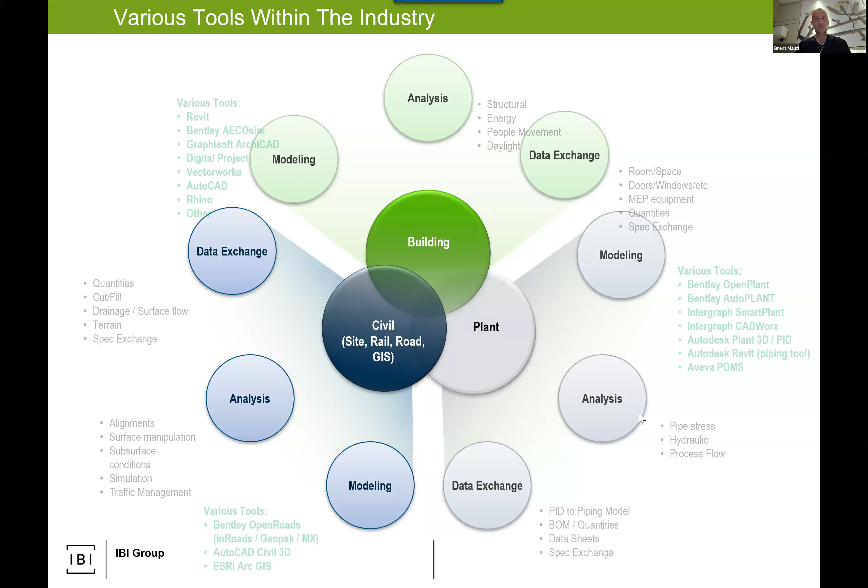When I talk BIM authorship, and I jumped through this slide the first day, the reason I define them this way is two main reasons. Number one, all of the vendors define it this way. If you go to a vendor, they'll usually tell you, we've got tools for vertical buildings, tools for linear infrastructure, tools for heavy industrial, plant, process, manufacturing. The other reason is you've got data standards that ensure interoperability to some extent across those tools. So think Revit, ArchiCAD, Vectorworks, etc. I don't have Allplan, which is in the same vendor, and I don't have BricsCAD, so my trusty bullet called Other covers me.

The IFC ISO standard, 16739, whatever it is, ensures common data taxonomy across building applications. What that means: door is door, wall is wall, slab is slab, roof is roof. Simple, right? If Revit does something phenomenally complex, the IFC standard will say, looks good, don't know what you mean. So you have a wall with weird parameters that aren't part of the standard. We'll grab wall, material, fire rating, plus length, width, height, area, volume, all fundamental things, and give it to ArchiCAD, Vectorworks, whatever, and those fundamental data taxonomy components will cross over.

Let me just see. I'll talk about plants in just a moment. So give me a second there.

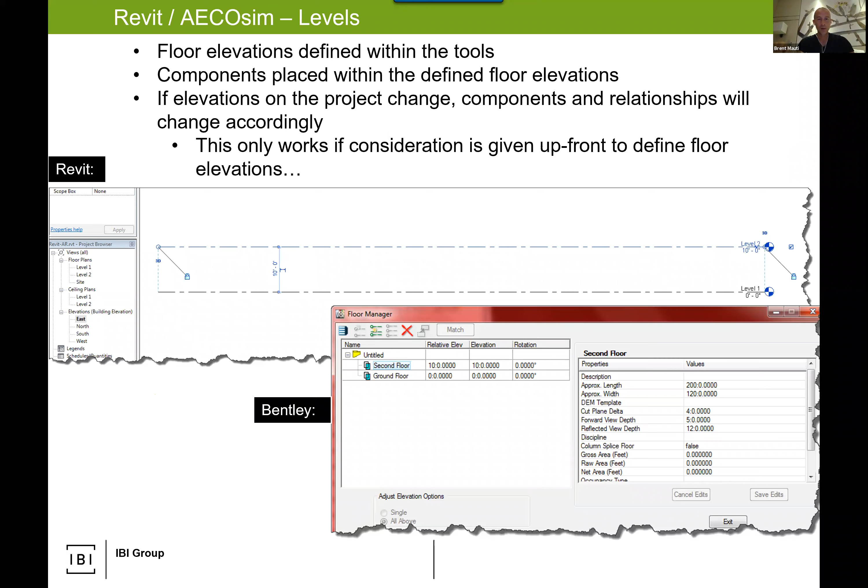These are ISO standard IFC components. When this goes to IFC, a level is a level. Your floor levels, walls—the complexity of walls is what do you want the makeup to be, but walls are walls. And you can't be unintelligent. You just have to place walls. You have your generic walls, you have sandwich walls.

They are the same. In Revit, I'll make a family. In Bentley, I make what they call a parametric cell. Guess what? It's a family. That's all it is.

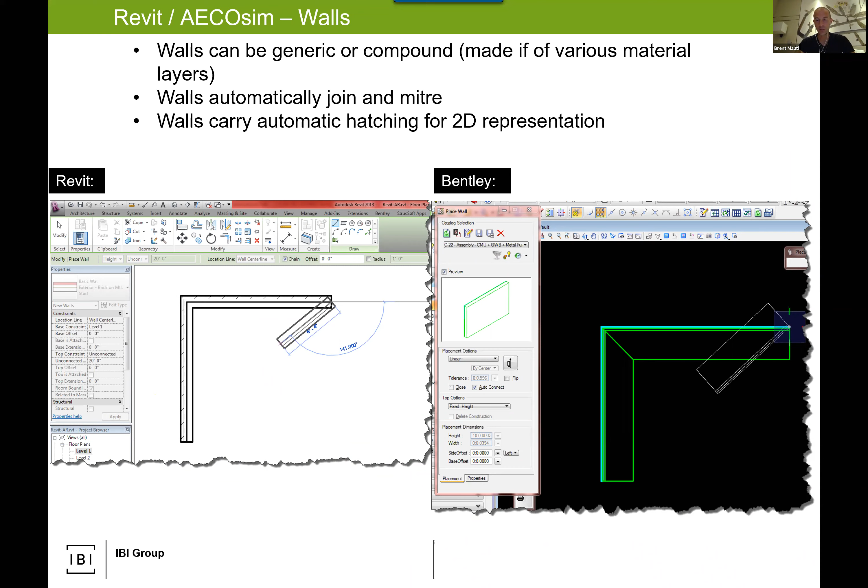Floors—you get the point here, what I'm trying to do? Same concept. I always say if I had nothing to do someday, I would want to make this box in every application. IBI should one day do it in Vectorworks, and I should do it in Allplan, because it'll be exactly the same. Floors flood between walls by points.

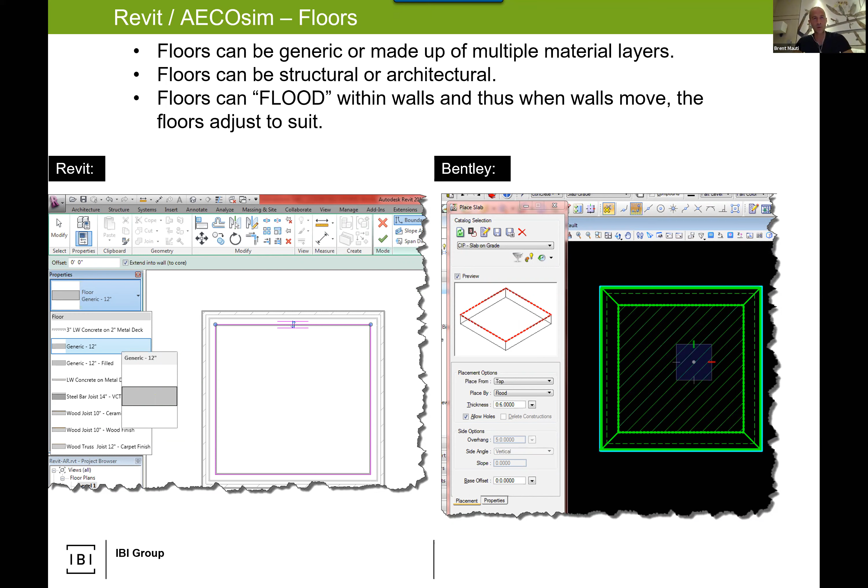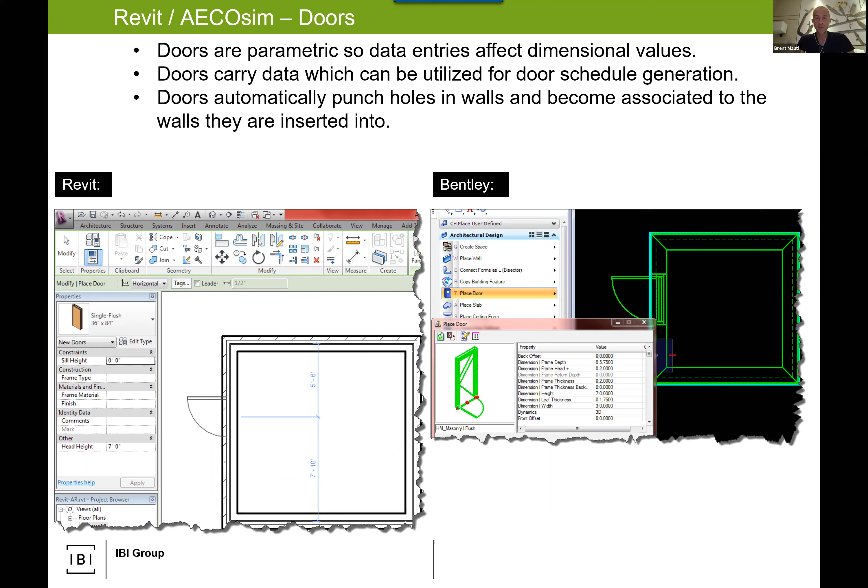Doors—every architect has to deal with doors. Well, they're all based on a library. Same with windows. When you place these, there are geometric constraints.

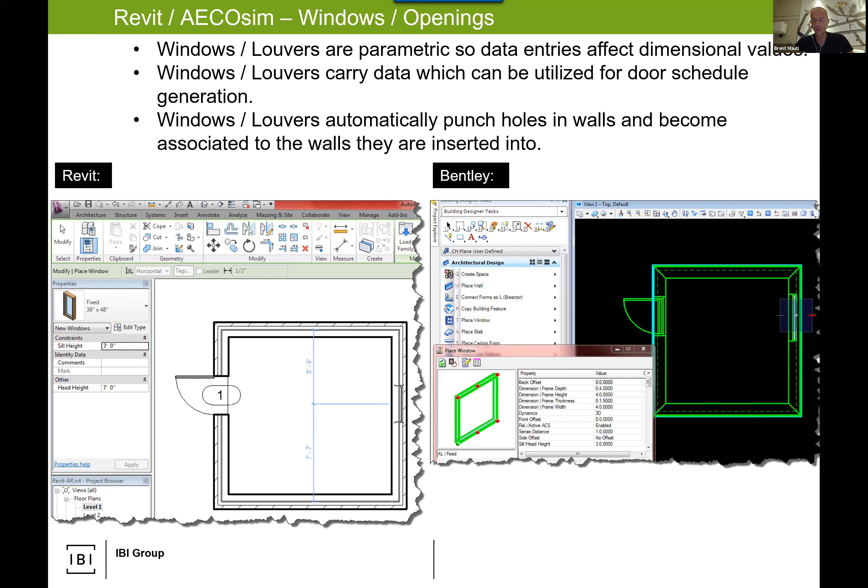On the instance of the door, I'll have all of the other parameters. Here's the geometry parameters in the instance. Here in Bentley, here's the geometry. If I scrolled that down, it would be all my parameters—hardware, fire rating, etc. It's all there. Specialty components like curtain walls, same thing.

And the trick, the real challenge—it's just like the dimension line. How do I make this in Bentley if I only know how to make a family in Revit? And I'll tell you, probably very easily. It's intriguing because Bentley has what they call the parametric builder.

In Revit, you open up an RFA or build a component and save it as a family. But they're the same. Once I'm in there manipulating it, it's unbelievable how common they are because they have to be—it's a curtain wall, and it's ISO standard.

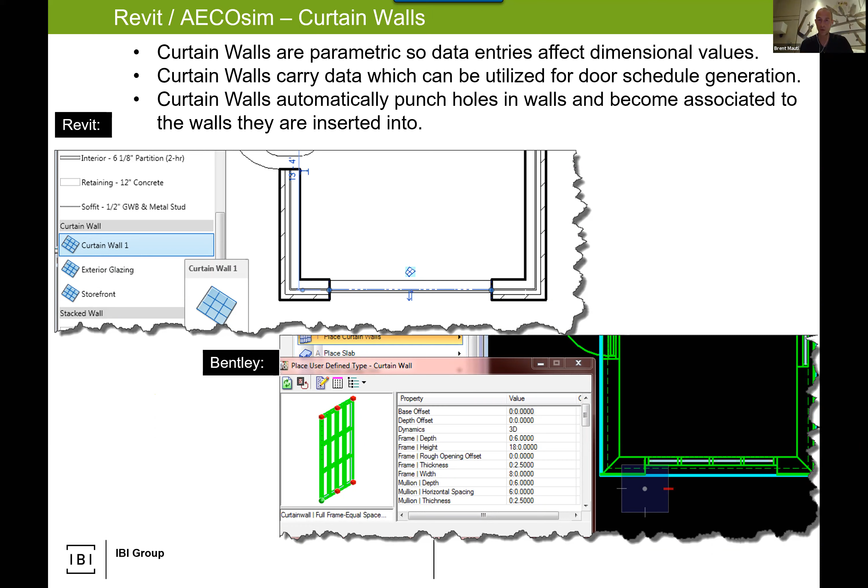Place a roof, same thing—slopes, all architecturally driven. Or is it a gable roof, a gambrel roof, a hip roof? None of that changes. Stairs are fun.

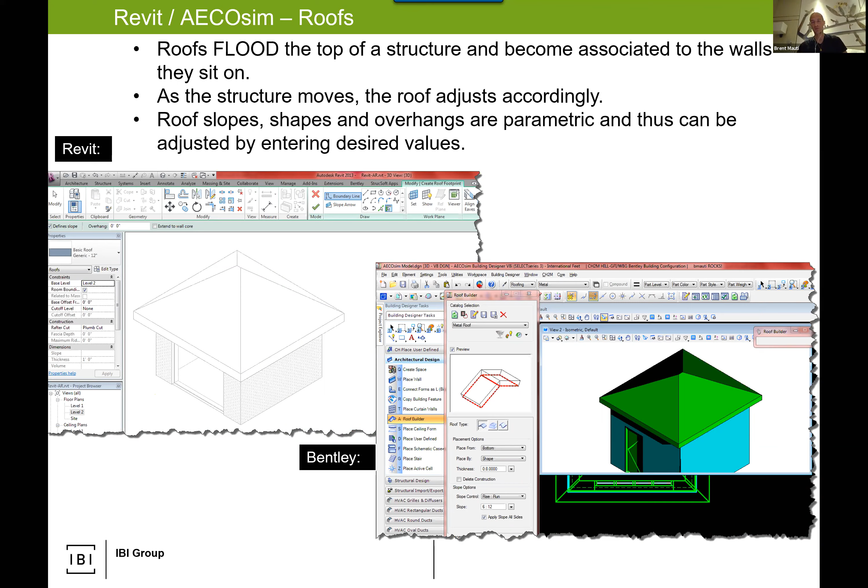And again, why this is so important is because we want to analyze our models at some point. So if we're able to analyze our stairs, then we're able to clearly analyze path to exit. So if I want to do a code analysis, I need to know my stair width, my rise, and my tread. All of that's geometric metadata sitting right here.

I would never draw lines and extrude it, like in the days of 3D modeling 20 years ago. Never. I need data, and the tools are so profusely intelligent that the data is always there for me.

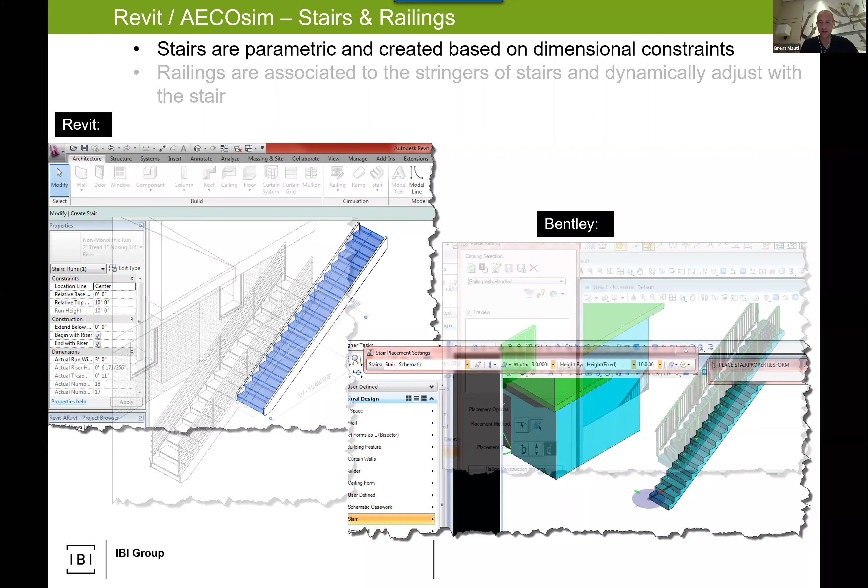Handrail, same thing—creating handrail, you can get as inventive as you want, but handrail is handrail. From a code perspective, from a design perspective, I want the aesthetic, but I want to be able to check: is my handrail this high? If it's not, bad. If it is, good. Simple. There's no subjective thinking—it just has to be what it has to be.

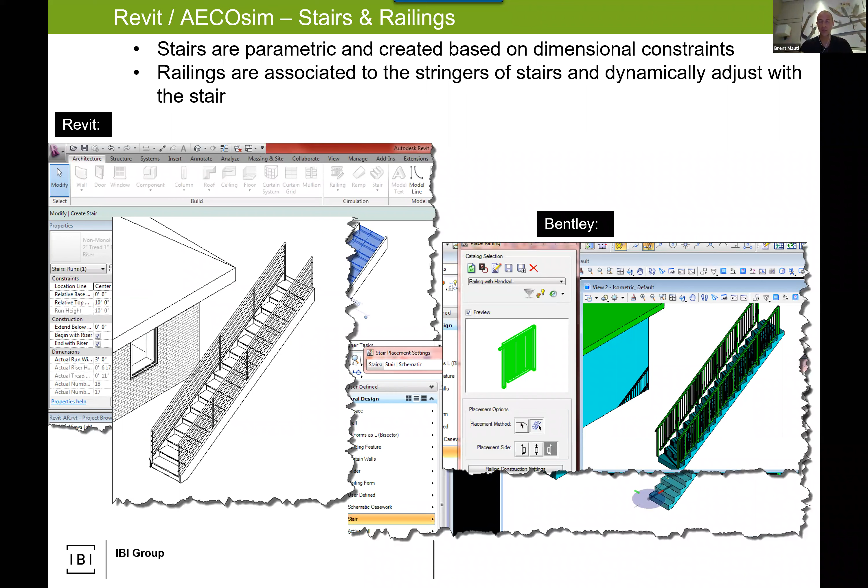And all that stuff gets built into these tools. Create drawings, visualize them however you want. So on the left, I show the traditional look that Revit does out of the box—looks like my pencil, yay for pencils. On the right, Bentley uses what it calls symbology, so I say I want it to be this color, and then it prints by color, and I could make it look like the Revit view if I wanted to. I can also force tags to show up.

Oh my God, brain fart.

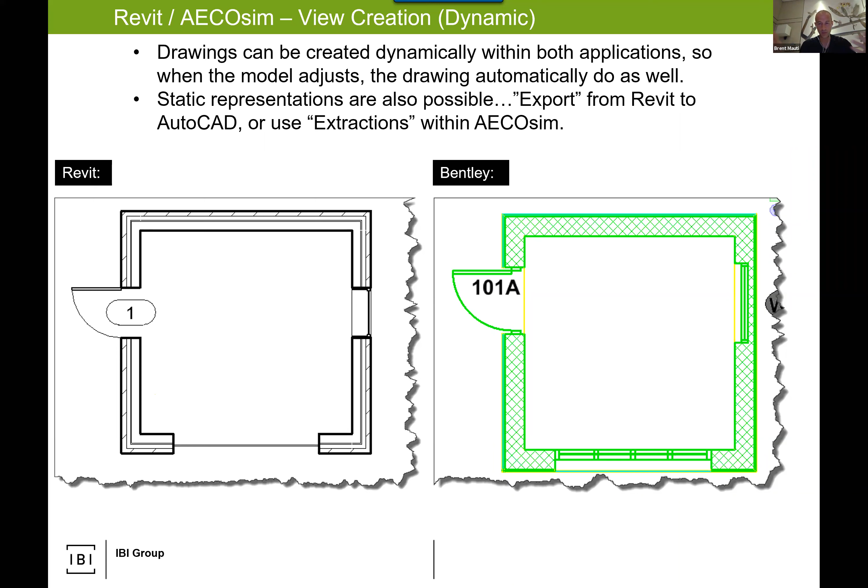Parameter values, parameters, tags in Bentley, parameters in Revit. You can use whatever symbol to make it show, but the data is all there, exactly the same. And you guys in your Revit course, this is what you're doing.

Structural - there's a backbone library. I think in two weeks I'll show a bit of what that data is. All of this is to support structural analysis. When I place these columns, all the data I enter is vehemently important. I described this once - this is a column.

I'm not going to place this column and then rotate it 90 degrees and say, yay, now I have a beam. No, you've just destroyed any hope of structural analysis. And I've seen people do that. Why is the building falling? I don't know, it looks fine in the model, but not in the analysis. It's because of simple things like that.

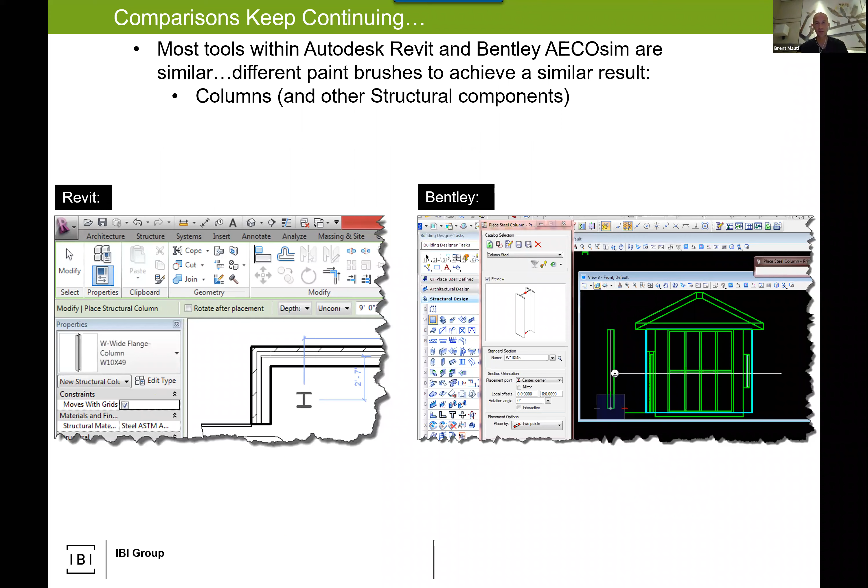Ductwork - it's all based on ducting standards, and some of them are based on how we actually spool ducts. So what are the sizes, what increments am I going to make a width? Here you see it's 18 inches wide, 12 inches deep. Am I going to make something 12.1 and 18.6653? I'd be crazy if I did that.

So what these tools do is actually prevent that - they have a bit of forced selection, which is what the plant tools do profusely on the plant side. But we want to control this a bit.

Same with cable trays - they're very specific because they have huge turning radiuses that have to be accounted for. Both Revit and Bentley have pretty good electrical tools built in to accommodate this. When you get to analysis, the question becomes: how many wires fit in my cable tray? Do I need two cable trays to fit more wires? How much current is flowing through my wires? What's my draw at the electrical feed? What's the current and voltage at all the distribution points?

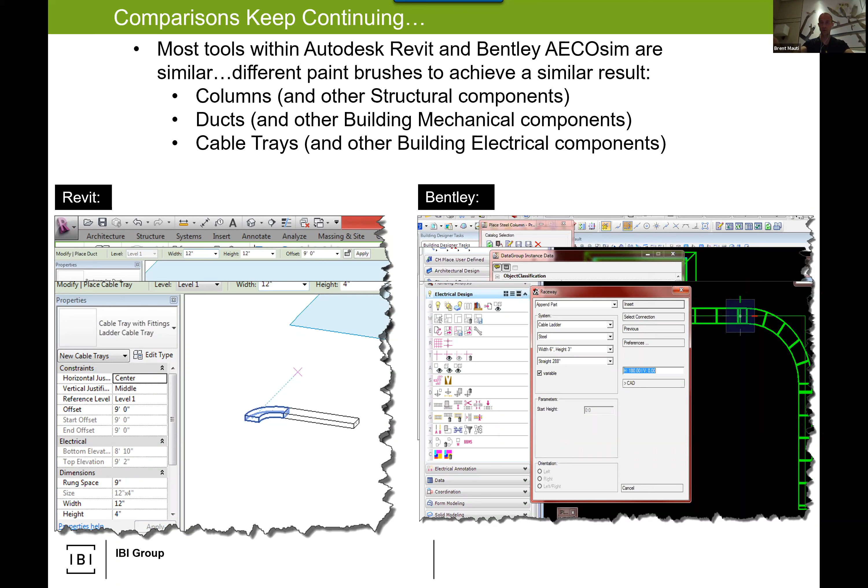Same with airflow - I skipped that here. When this is all right, what's my air pressure here? Once I turn the corner, what's my air pressure there? These are your 90-degree square ducts - what if I turn them into 90-degree elbows? How does that better my flow? Because I don't have the hard stop as I do here.

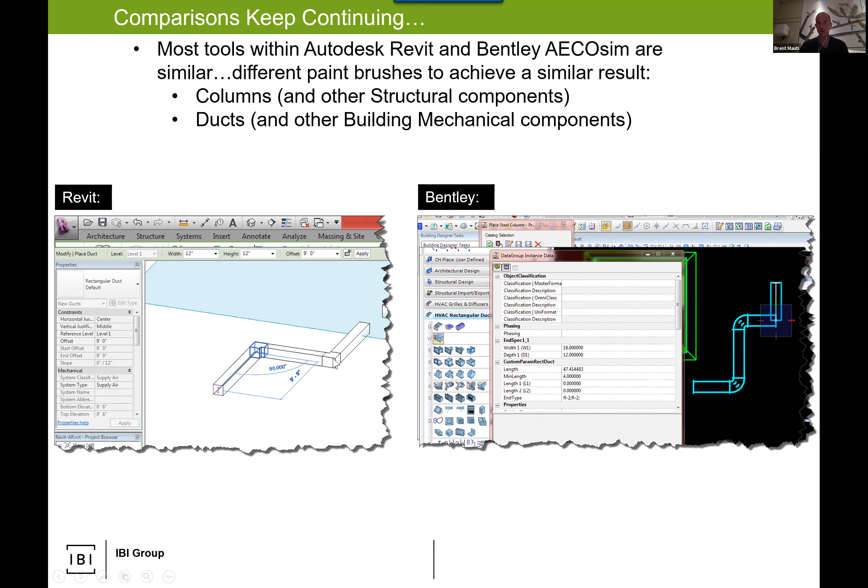The other thing Bentley's done - as I said, Autodesk is notorious for buying a bunch of stuff and having these buckets: Autodesk, AutoCAD, Revit, Navisworks, Inventor, and others, and that's it. Then we complain as users - oh my God, I need to use Inventor to make a component, how do I get it into a Revit family? Autodesk says okay, we'll try to get a way to get from Inventor into Revit, and now we can.

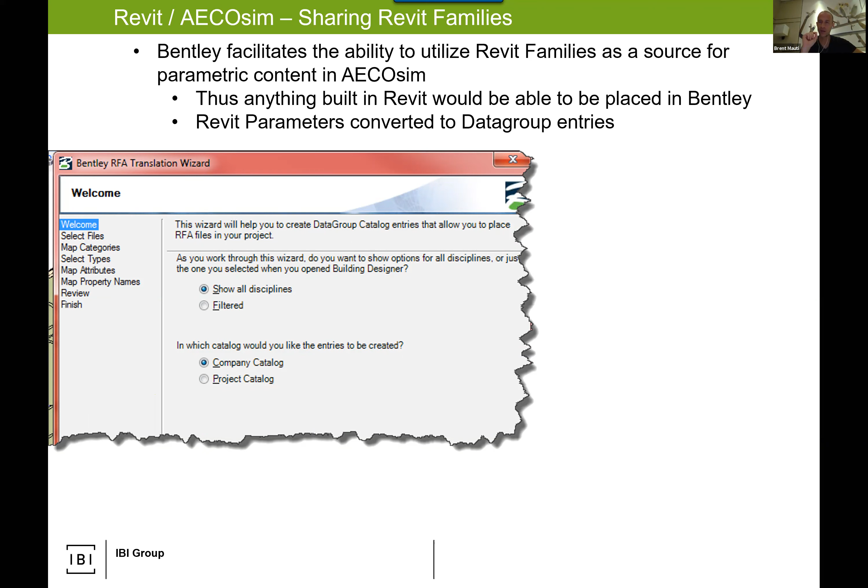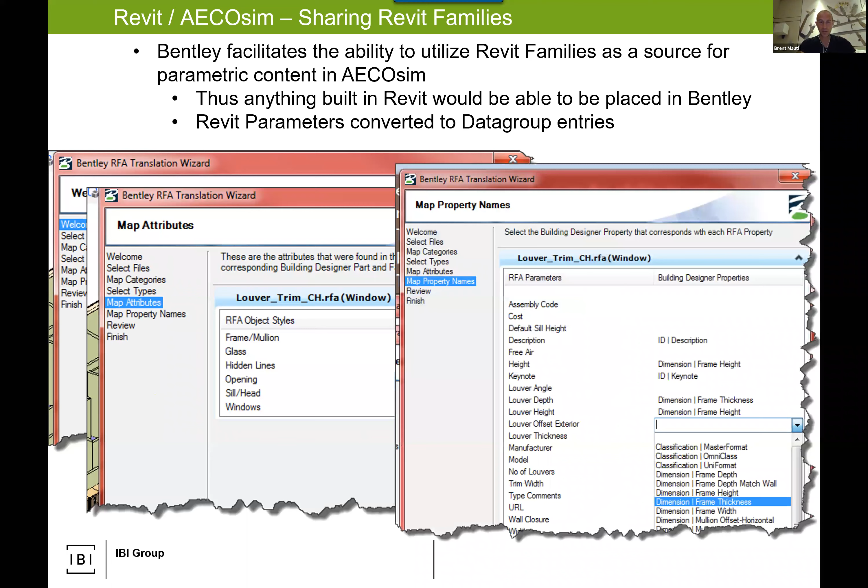Bentley, this is from five years ago, said you know what, there's a whole host of really awesome Revit files out there, Revit families. Let's build an importer that can bring an RFA into Bentley and map the parameters to Bentley data. A wonderful thing - anytime we have a Bentley project at IBI, there's none of this 'oh my God, we're going to waste so much time remaking all our content.' No, we're just going to drop our content in. Very powerful - this is what Bentley calls its RFA translation or RFA interpreter.

This helps them, because they have a good foothold on the civil side, convince their civil-based clients - transit clients - you can ask for the building to be in Bentley's OpenBuildings, and don't worry, your consultants won't revolt because all their content can be brought in. The consultants will still complain if they're Revit users, but they can't say we lose all our content.

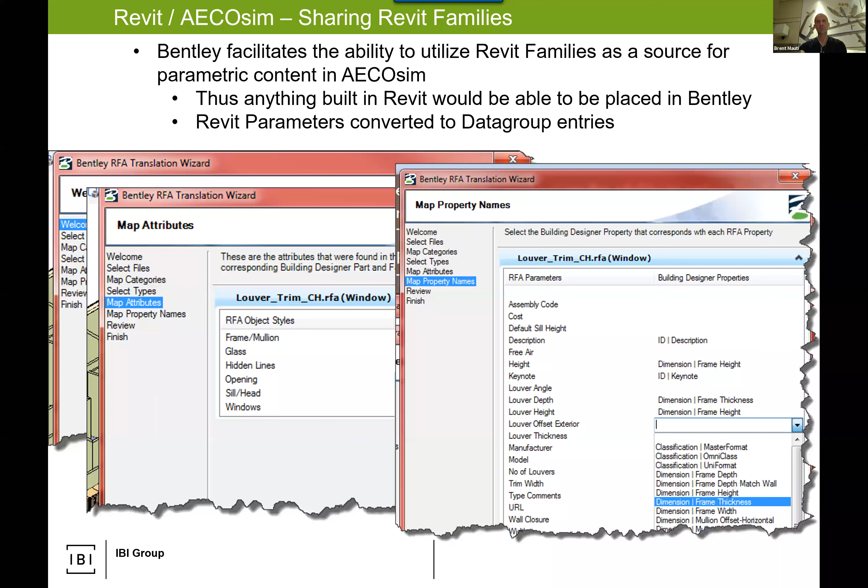Just a brief one here - because the data is interoperable based on the IFC standard, the ISO standard, this was a research project I did with the University of Toronto. Again, this is now 2013. We said let's make a tool to pass data to and from Revit and Bentley.

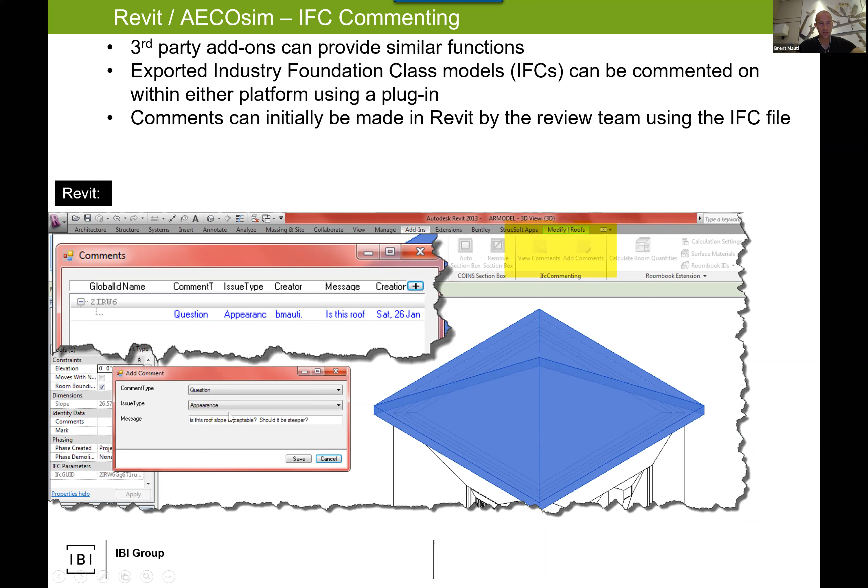So we built this little IFC commenting tool - it was a little add-on. We said we just want to start to add dialogue to components. So this is added to a Revit roof - is this a question about the roof? Somebody then takes that file and brings it into Bentley.

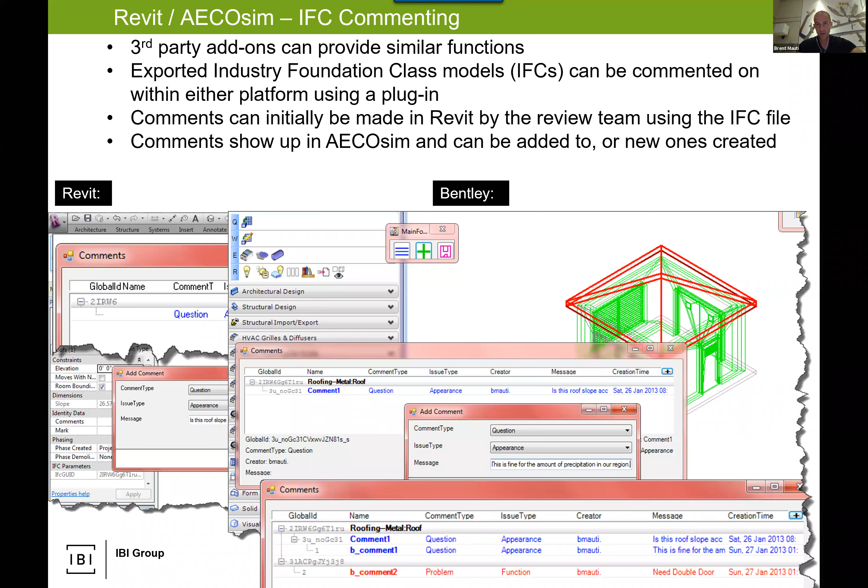Okay, so this is a Revit model that goes out to IFC. The IFC comes into Bentley, and I can add a comment to the response to the comment. Then we have a general dialogue that goes back and forth between Revit and Bentley. In Revit, I can bring those comments back in.

Now, it was a prototype, it was an idea. And the reason we saw value to this, and why I would show this to you, is this is the power - this isn't commercial or anything, but this is the power of traversing information to and from applications. The critical thing though is understanding what can traverse. Using IFC as the lowest common denominator allows it to happen.

Now, you'll go in the industry, you'll hear IFC sucks. You say, well, why? And it's always down to this: I tried to bring an IFC model from Bentley into Revit and then model in Revit, and I couldn't do it because you name it, or vice versa. And I say, well, obviously, IFC was never really meant to say, let me go from Revit, stop authoring, go to Vectorworks, and continue.

It's allowing us to traverse the lowest common denominator. So if I was in Vectorworks and you were in Revit, I would say, I need your model, what you're authoring, as a backdrop for my work. So let's say you're doing architectural and structural, and I'm just doing building mechanical. I want to run my ducts in and around the walls, the ceiling, the columns, etc.

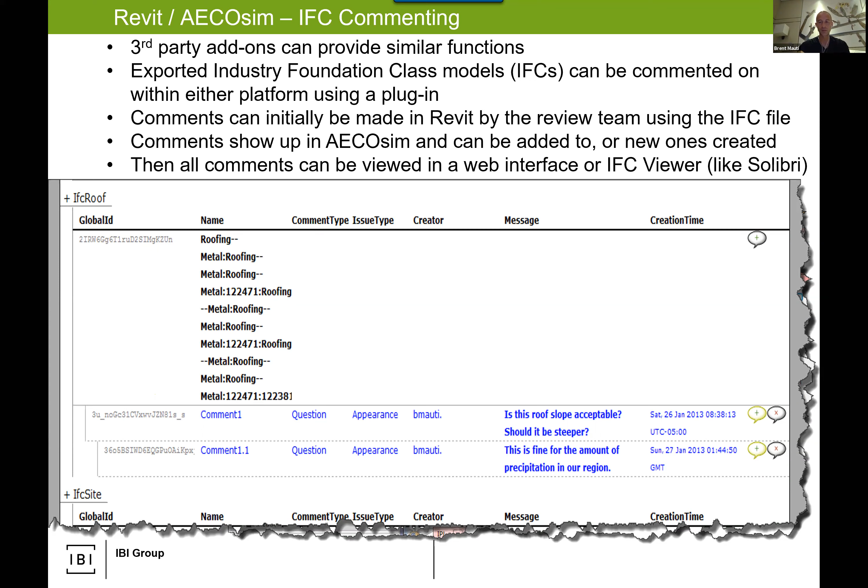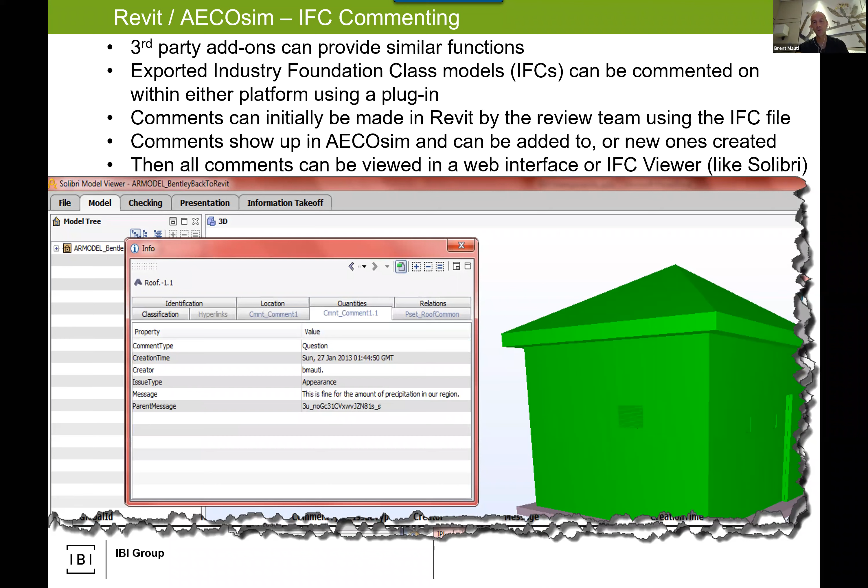And then here, just showing in Solibri all of the data - the comments were recognized because it was standard IFC taxonomy. So conceptually, you grab data and you do more with it. So that's the building world, and I highlight Revit - it's the most prevalent, it's what IBI uses, but as I said, we use others as well.

Civil BIM authoring tools, okay? When I say it this way, sometimes I get the dirty looks, like BIM is for buildings. BIM has building authoring tools. BIM has civil authoring tools. And I press this - civil being not structural, not building structural, okay?

Structural design is governed by the IFC standard, which is why it's placed inside buildings. This concept of civil structures, it's just - I want to say semantics - that we have to just overcome, especially in the industry where a civil engineer does building structures. It's just, we have to just understand the differences. So civil tools, talked a bit about this already.

Couple things that I want to stress on here. So if I ask a question - which civil BIM authoring tool sits on AutoCAD as its native - it's Civil 3D. Hence, it's called AutoCAD Civil 3D. People don't know that, and it's made by Autodesk. I've heard people bastardize that.

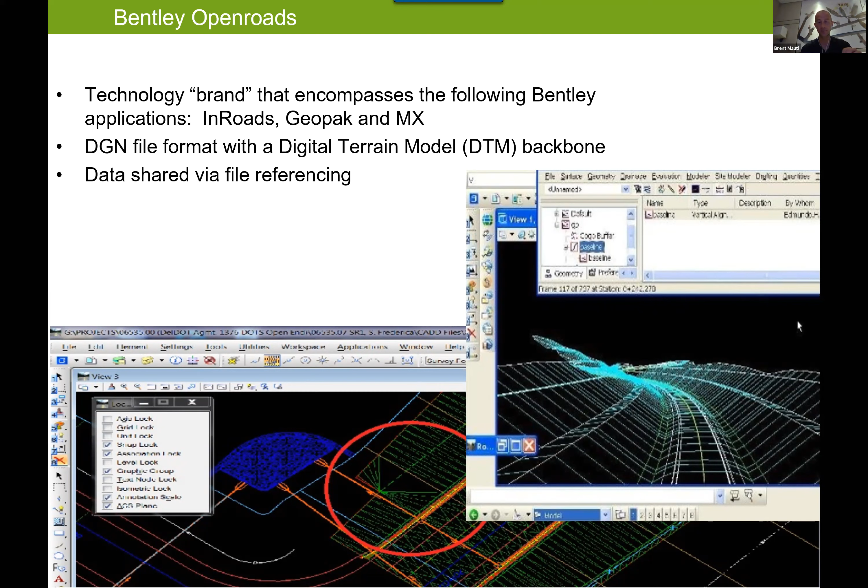Okay, so these are the tools. And I only show one, but it's InRoads, GEOPAK, MX, Open. It's all conceptually the same. Then there's this, my favorite. You install the site toolbar in Revit. And you have site tools. And now it gets a little more intelligent. You can import gbXML. You can import the XML of civil, LandXML, I think. You can bring things in. Awesome. But I describe this as the architect's site tools.

Civil engineers can't use this. There's no integration of civil data. There's no civil analytics. There's no civil anything. What this does is it allows me to connect or bring a Civil 3D model into Revit for me to use as a potential reference. And I think that's critical. So that goes back to that IFC concept. I'm not going to export Revit to IFC so you can model in Vectorworks. I'm not going to import Civil 3D into Revit so that the civil engineer can now come and do engineering in Revit, site analysis, cut fill analysis. They wouldn't do that.

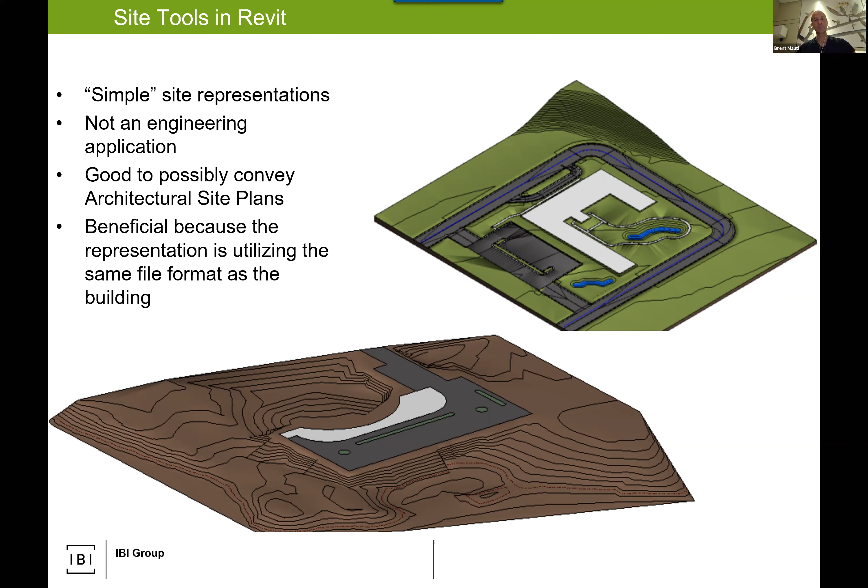Landscape. Landscape BIM is in the nether world of BIM, okay? There is no landscape BIM tool, and there's actually a really good document. It would take me too long to find it, so I won't try. It's a pink book published in the UK called, I think, just BIM for Landscape. And it just talks about the fact that there is no tool. So we're going to get situations like this. So we ask the question, we have landscape architecture. What do we want to do?

Revit is on there because oftentimes landscape is dealing with rectilinear portions of the site immediately outside the building. So imagine you have your building and then you have a landscape planter, maybe multiple levels on your building that are landscaped. Basically the underpinning of what you see is a Revit model. Then we use Revit.

The best example is hard urban landscape. You walk into any downtown area, you see all of these stepped landscapes. Well, they're all on top of parking garages or whatever. There are models, or there should be models, of all the stuff underneath. So if I have a Revit concrete slab, I just need to add the detail, add the layer of what the landscape will be. So we might add a landscape slab, a slab representing the layers of landscape, and then put in components.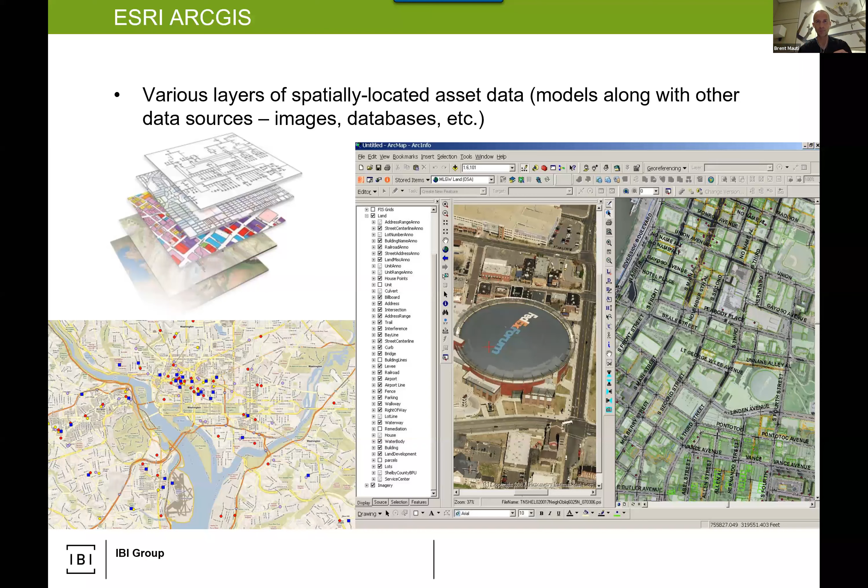So I always say, if we're working properly from macro to micro, you've got your city layer, your street layer, you get to your building, the building as a whole. Then you kick in your BIMs and you get into the inside of the building, right down to the components and asset management, macro to micro. So that's the civil world.

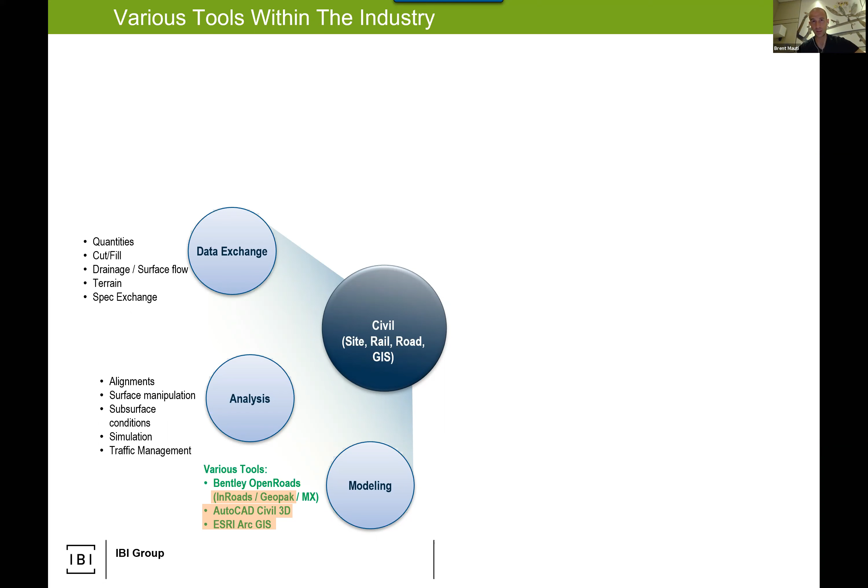In IBI Group, we actually use all of these. Again, my only experience with MX was back in my CH2M Hill days, only in Australia and Singapore. But we use these, which are all now branded through OpenRoads. So if you're doing civil-based work, civil engineering, linear infrastructure, you're going to come across them all. And if you're doing just building stuff, you'll see them both.

Well, what do you mean? You draw the center line of the pipe. Yeah, but I got to fill out all this stuff. Well, you should have been doing that to begin with. What are you modeling? What are you drawing? And then you get all these dumb conversations, right? The point is, like place wall in Revit. What wall are you placing? What door are you placing? Is it fire rated? Is it generic?

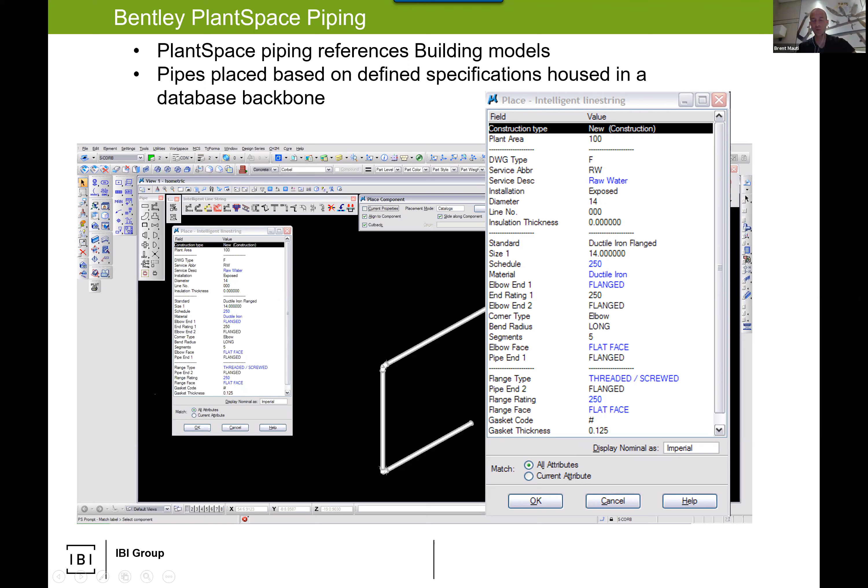Make a selection. Here, there's a little more selections, but they're all controlled. So notice the blue things, that's all I can pick. Everything else just happens. So when I pick raw water, it sets all these other things. Then I can pick a couple sizes, and away I go. This is what the database looks like. So this is a piping spec.

And as an architect, learning this was intriguing. But all it basically does is it says, for this service, so for atmospheric air, this is the pipe spec, C208, PVC, fiberglass reinforced plastic, FRP. So that's your pipe spec. That's your size. I can go 0.125 to 144. This must be imperial in inches. So I think that's 144 inches down to 0.125 inch.

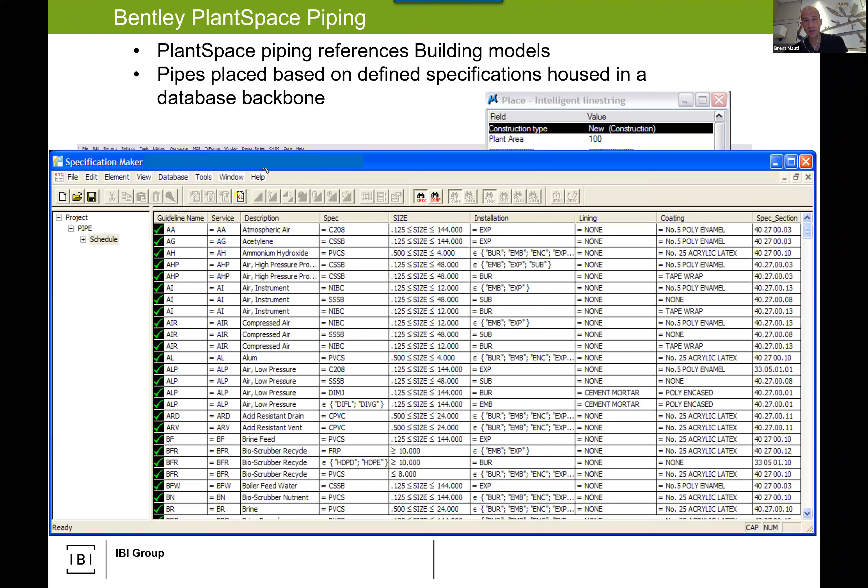Exposed installation, no lining, and that's its coating. And that's its spec. I'm going to talk about linking to specs later. Very critical. Once this data is set, I model. And it's that easy. So that was Bentley's PlantSpace. Bentley AutoPLANT. And I notice I put here AutoPLANT piping for AutoCAD. This is Bentley's application that sits on top of AutoCAD. Same concept. There's a database.

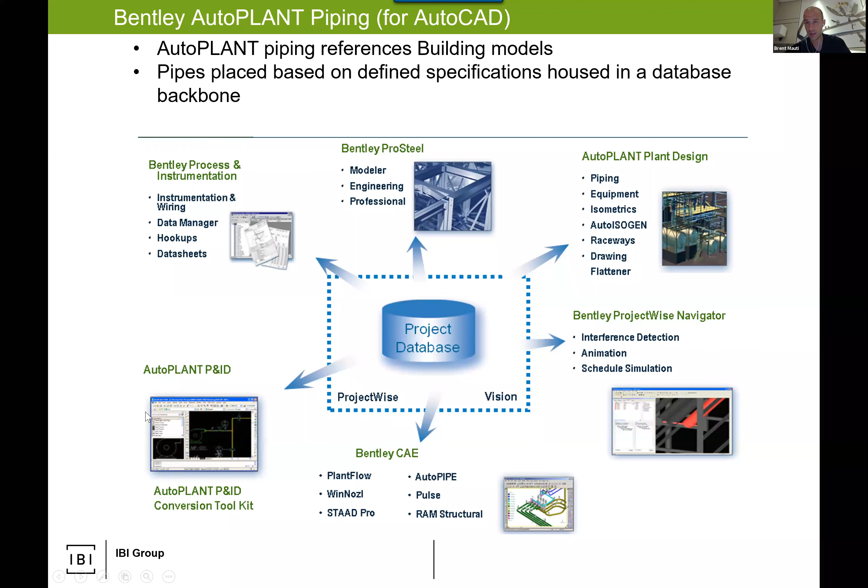And it's just like this is your typical BIM diagram. Put your building in the middle instead of your piping. It's the same thing. Okay? Notice the ability, though, to analyze flow, pipe stress. That's the critical piece. And the linkage to the P&ID. All of these pipe tools will have a linkage to the P&ID. Very critical. This is what it looks like. AutoCAD interface. There you go.

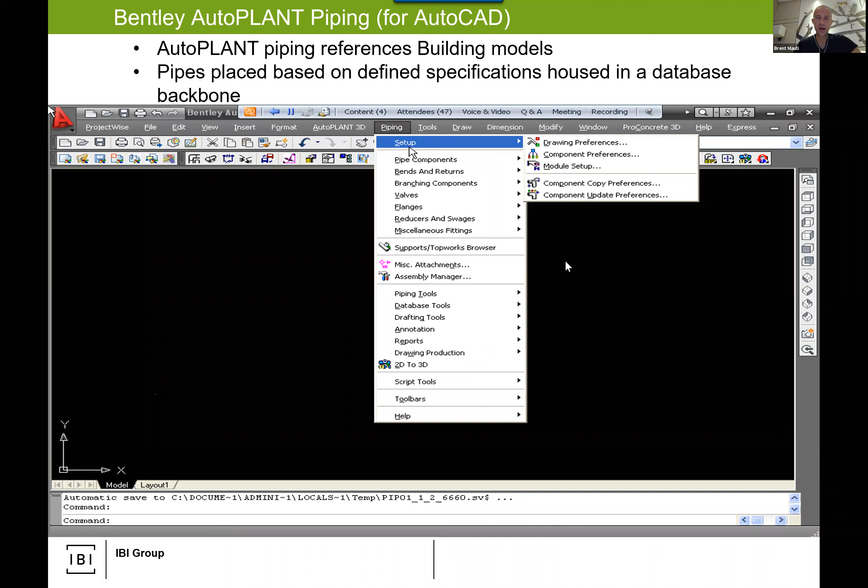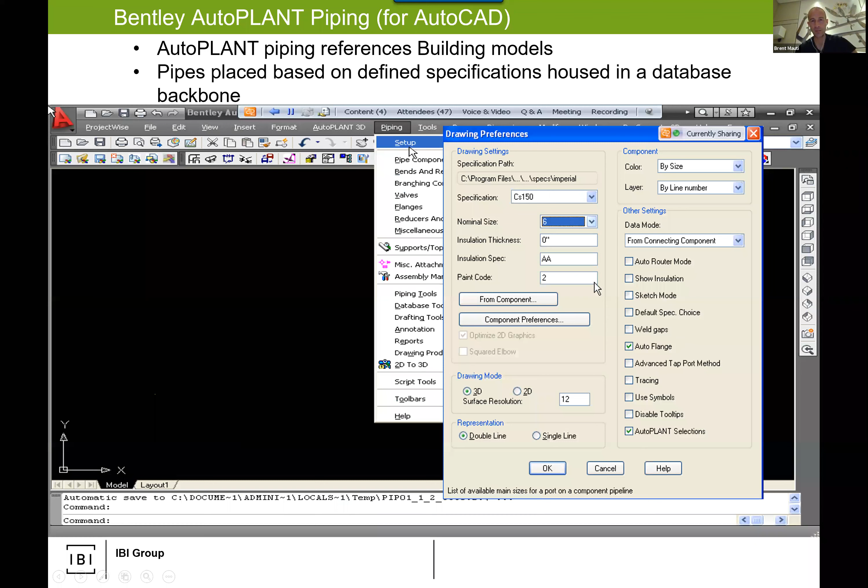What's your spec? What's your size? Insulation. All of these values. Some autofill, some you select. It tracks what you place. Has the spec backbone. Again, watercolor versus oil. It's all the same. This is the ISO 15926. This is where it comes into play.

So when you say all these things, what's a pipe, a fastener, a nozzle, an orifice, reducer, spacer, it knows what they are. Valves, different types of valves. It's all common. All that nomenclature is defined by the spec standard. I can't remember what the OLET was, and whatever, doesn't matter.

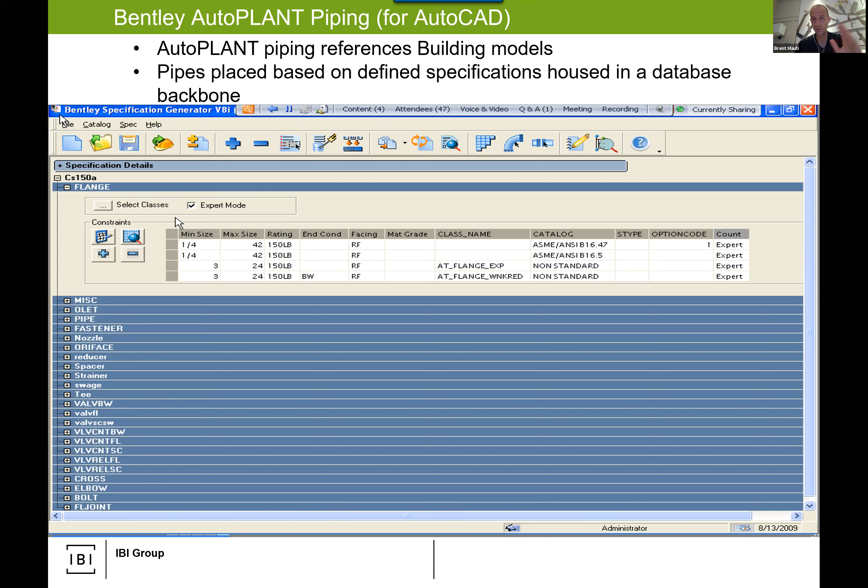It's not on any test. It's a defined term. And you get this. There's your model. There's all of your pieces in the flow stream. This is the schematic. So all this stuff down here is all that stuff over there. Okay? It tracks it. It makes sure they're in sync.

Auto generation of an isometric. Grab a flow stream, give me an isometric. It auto dimensions it all. It auto populates all the components. Powerful when modeled right with a good spec.

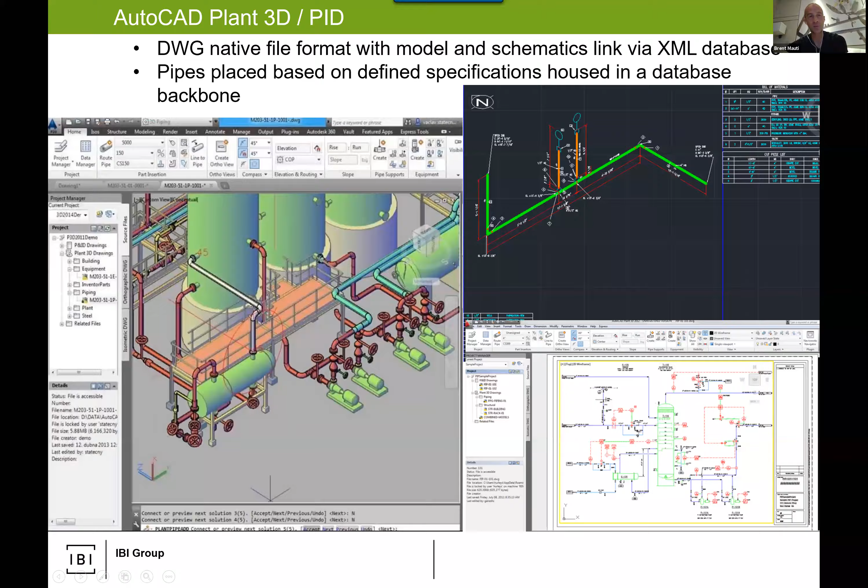Intergraph SmartPlant P&ID or SmartPlant 3D. Same concept. You're going to notice commonalities here. Used to be called PDS. Now it's called SmartPlant 3D. This is the old look, how it looked. All the same stuff though. You're going to notice this is decades.

Loading from your P&ID, what are your bend radiuses, the types of your valves, the branches. All of these are piping components, all explicitly tied to a database that's compatible with ISO 15926.

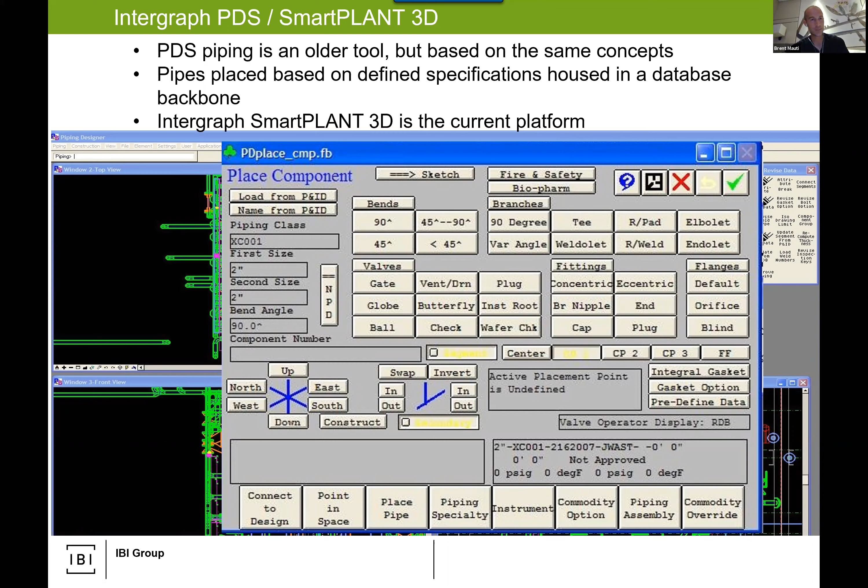Bentley's OpenPlant, same thing. Grab a spec, place a component. It allows you, critical, to pull specs from different systems. So in keeping with Bentley, they allow you to put Revit families inside their tool. They allow you to take specs from other systems and drop them into their OpenPlant.

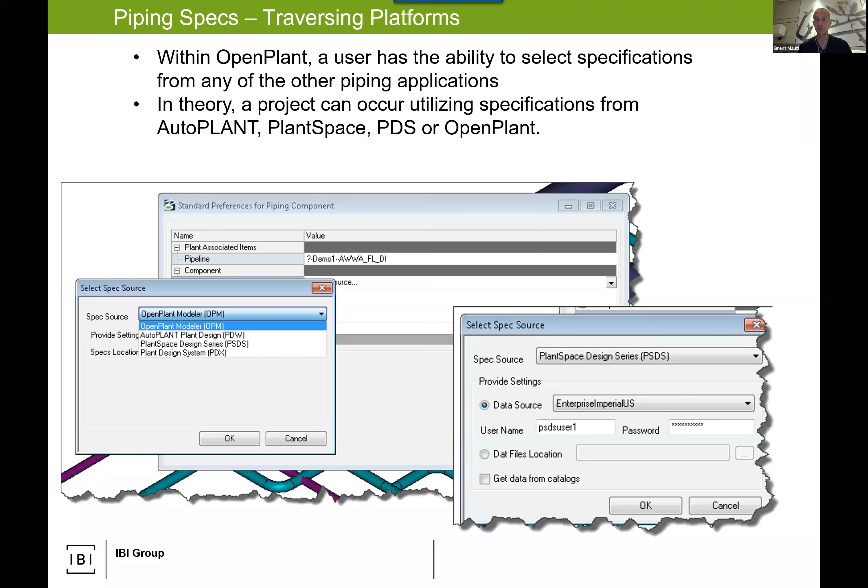Pretty sure I asked that as one of the questions, either true, false, or as a question. OpenPlant is the one that's specifically designed to bring in specs from any other system explicitly. That's plant. We don't do a lot of plant work, but when we do, we try to use the Autodesk Plant 3D tool just to try to have that consistency in the DWG format.

I didn't show CADWorx. Again, Plant 3D and CADWorx would look very similar to AutoPlant. Sits on AutoCAD. Hit place pipe, pick your spec, decide whatever you're allowed to decide, model, link back to your P&ID, find out if you did good.

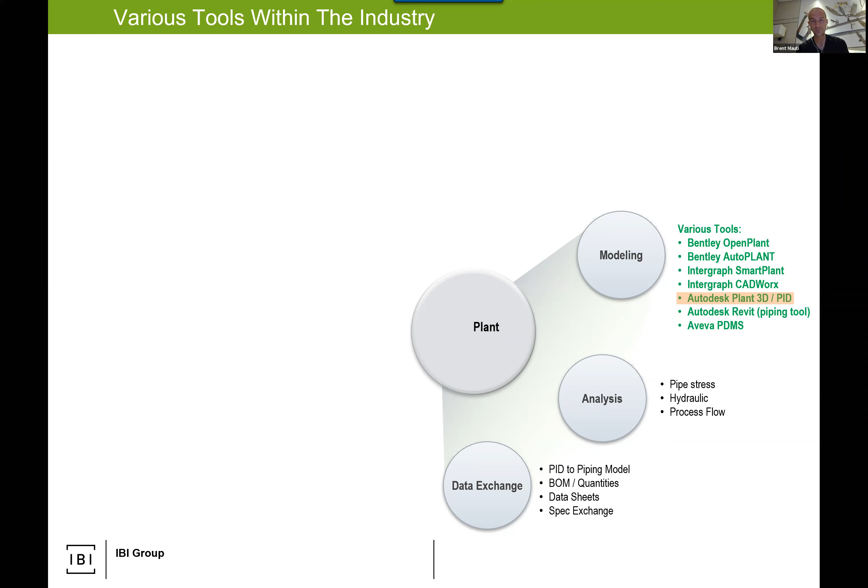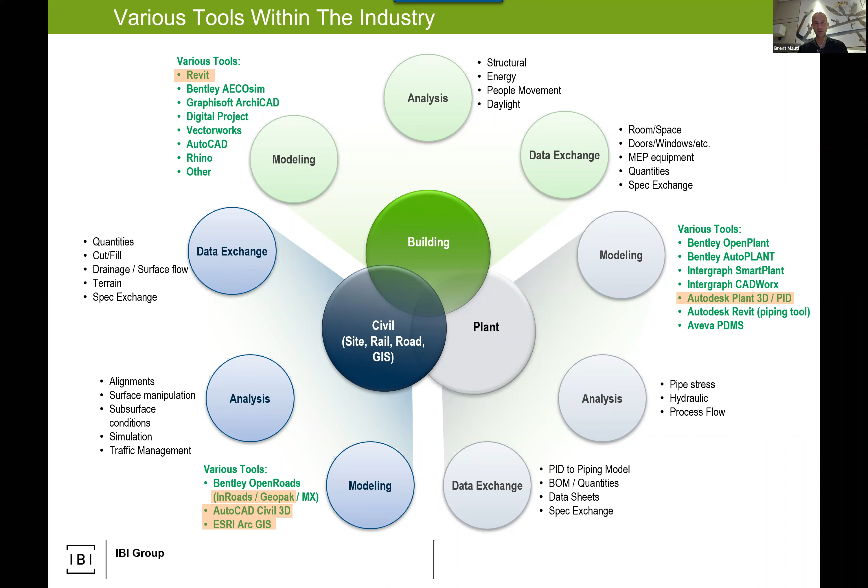So I know that part's a lot, and that's why I dedicate one class to this. Because when we talk about authoring tools, there's a lot of things to consider. And that doesn't even touch on these next pieces here. So I'll say a BIM model review tool or just model review.

And it's amazing, in my George Brown class, I say, who's familiar with Navisworks? And like one person out of 100 put their hand up. And I said, wow, because they're all Revit. That's all they've taught there. I keep stressing, Revit is fine. It does its thing. You can do live model review if everything's in there.

Navisworks is explicitly designed to take in anything. Okay, that's the Navisworks beauty. If you have Inventor, SolidWorks, Bentley, anything Bentley, Revit, ArchiCAD, Tekla, whatever, Allplan. I've never brought in an Allplan, but I'm sure it can. BricsCAD, Vectorworks, everything comes in, and then you see it.

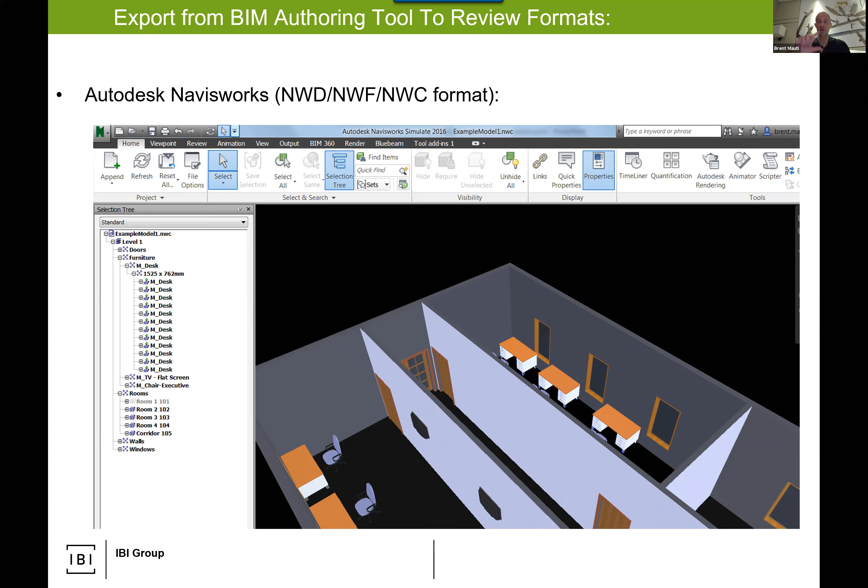Excellent on geometry, very important point here for test and just knowledge. Excellent on geometry, not the best with data. So its thing is we'll bring all the geometry for you to look at and see, but it doesn't worry about data. Navigator is a flip. I describe it: they're the snob of BIM review. As a snob, they will only bring in things that they've guaranteed you get model and data.

Navisworks, bring in anything. You want to see the geometry. Bentley, model and data come together. So I'll show it in a sec. They actually have a plugin to Revit. They have a plugin to SmartPlant 3D. They're making a plugin for Civil 3D. They've been making it for years. It'll eventually show up. They have a plugin for ArchiCAD, I believe.

So there, as a Revit user, I push a button. It exports my central model to an iModel and brings all the data. So I can click on any of this stuff from Revit, see all of the parameters, interact with it, and do stuff with it. So a very, very powerful capability.

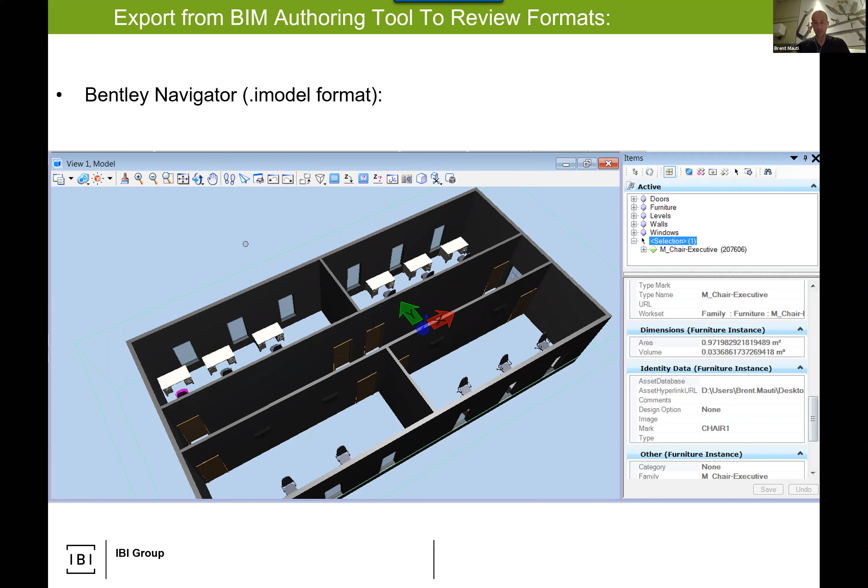IFC, any building BIM authoring tool. Bentley will allow me to do an iModel for all their civil applications. Any building BIM authoring tool can be exported to an IFC. And then you can use Solibri, BIMsight, DDS-CAD, whatever. My preference is Solibri. Awesome, awesome tool, especially the free viewer, let alone the purchase.

IFC brings geometry plus data. And as I've said, I like lowest common denominator. So again, you can see here, I'm always using the same model. It transverses. If there's something funky, funky won't go, but for the most part, everything will.

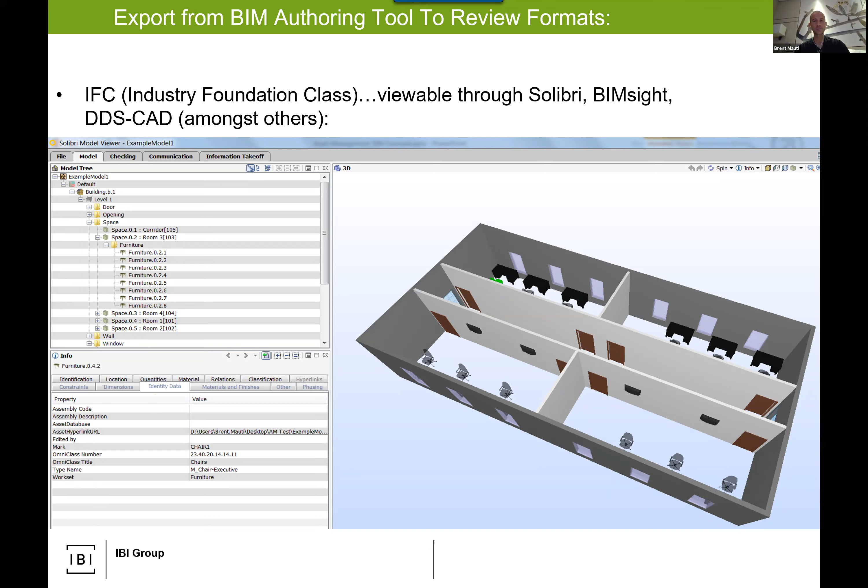IFC. 3D PDF. More so for just viewing. You get a little bit of layer data, component data, things you could turn off and on. So really here, it's just seeing the Revit families. I could turn each family off. Usually it might show me work sets. In the Bentley world, it brings over the layers and levels. So interesting. Easy to break a 3D PDF.

So in Bentley, you print to Adobe, Activate 3D. In Revit, I believe it only works with the Bluebeam install, Bluebeam print to 3D PDF. If your model is really, really complex, it won't work. And I've seen that, especially with heavy plant models. For the most part, it does its thing.

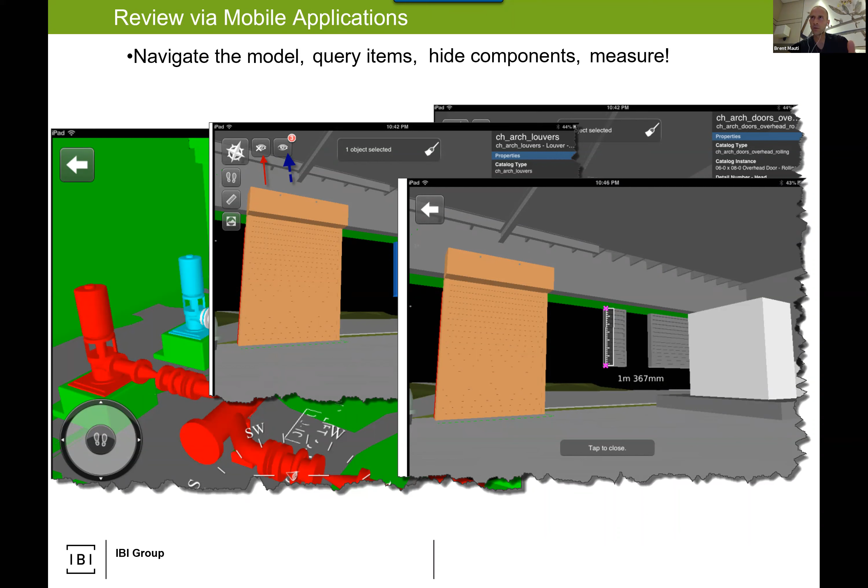And then a lot of mobile application review. This is just Bentley Navigator Mobile, BIM 360 Glue Mobile, you name it. There's one you listed in your matrix, the mobile one for ArchiCAD, BIMx, I think it is. Can't remember the Graphisoft one. Every vendor has a mobile app. I don't know of a good IFC mobile viewer, but there should be one out there too.

And then some other tools. So conceptual, I mentioned we use a lot of Rhino and Grasshopper, and maybe in another class, I'll show some of our examples in the case study one. But SketchUp and InfraWorks, a lot of people will say, I know SketchUp. What about InfraWorks? InfraWorks, I describe it sort of as the SketchUp for civil. It's done by Autodesk, so it migrates to Civil 3D very well. Bentley, of course, they're different. So I believe theirs is now called Concept Station, and that will migrate into OpenRoads. So these conceptual ones are kind of in parallel streams.

The beauty about InfraWorks is it's kind of like GIS. It brings in a whole host of mapping data sources, but then lets you model components of roads and bridges and sidewalk, just very quickly, very schematically, but it kind of interacts with the brought in data. So a very cool tool, some analysis, some plan and profile analysis, and then you can export it to Civil 3D and do proper and more advanced work.

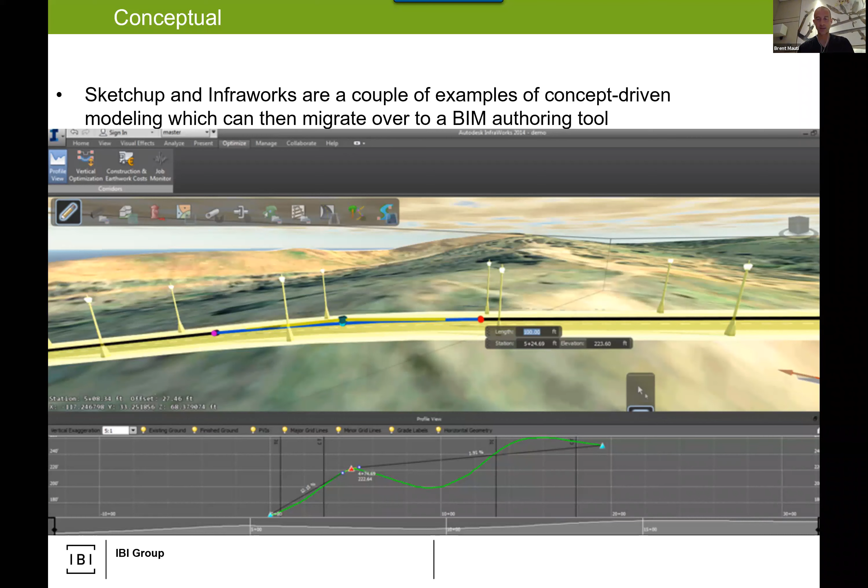So pretty cool. Point Cloud, ReCap, most people know ReCap. Do people know Descartes? Bentley's version, does the same thing, Point Cloud, bringing in cleanup, manipulation, etc. Again, they both do the job. I have no preference.

4D schedule simulation. Here are a couple like Vico, Asta, Synchro. Some of you named some others. Awesome. Links to schedules, Microsoft Project, Primavera P6, other simple projects, simple schedules, or you can make your own. Oftentimes, and I don't like it, architects will be asked, can you do a quick schedule simulation for us? And I'll say, sure, bottom to top. So you can just make a simple task, and there might be 10, 15 tasks, and you just make the thing grow over time.

And it doesn't detract from BIM. For me, it enhances regions of responsibility. Why would you ask the architect to give a construction simulation schedule? I will tell you how the thing is going to grow out of the ground, not how the cranes and stuff are going to be brought in. That's a construction schedule.

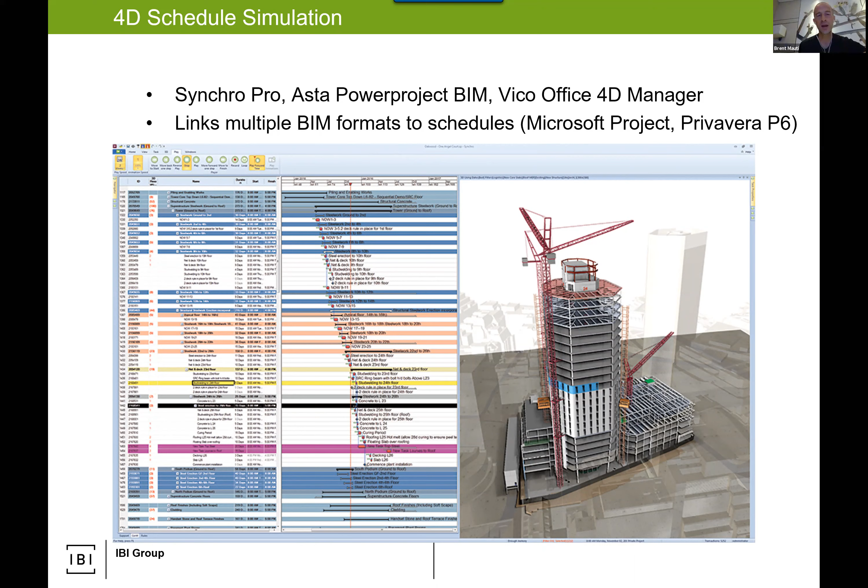So fabrication, this is where I bring in Tekla. Usually we don't see Tekla as an authoring tool. We usually see it bring in AECOsim or Revit or ArchiCAD or something and bring it to a higher LOD, level of development. So I'll do 300. This will bring it to the 350 range, how it's going to be assembled and constructed, and then 400, how it was actually constructed. And from a liability perspective, no structural engineer in design will ever do that, because that's always done by a shop drawing engineer and then a fabricator slash installer.

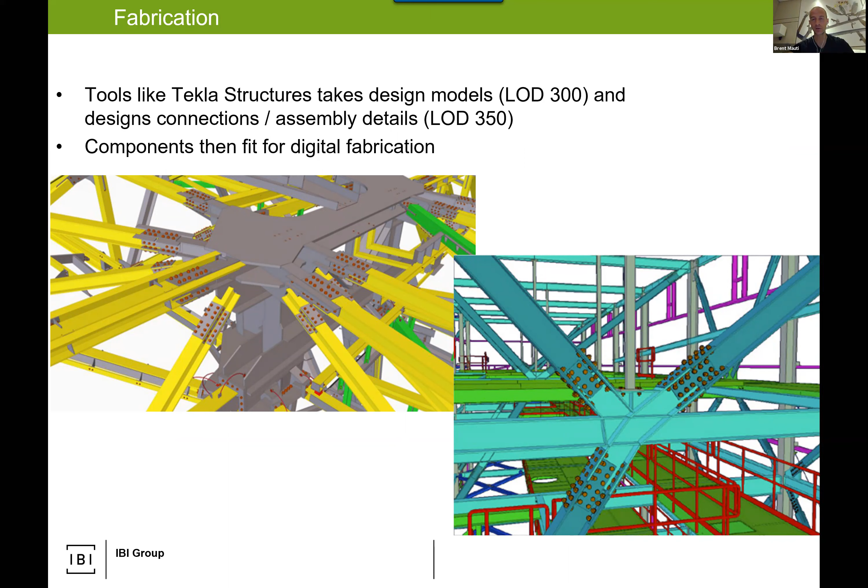So in the BIM world, you might say, well, you can. Sure, that's why we have level of development. We won't as designers, someone will as a fabricator. And I always have to remind myself, this is BIM 1040. When you get to BIM 2040, you get into, okay, so now I am the fabricator, I am the contractor. How do I define what I'm supposed to do and why we do it, et cetera?

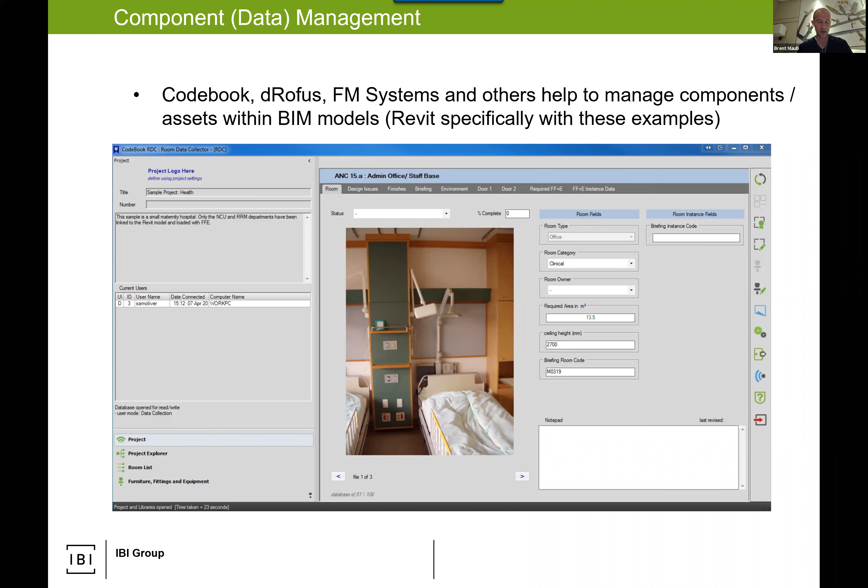Room data management tools link to Revit. Codebook and dRofus are from the same manufacturer as Vectorworks, ArchiCAD, and Allplan - that's Nemetschek, a pretty good company, very well known in Europe, lesser known in North America, but with phenomenal tools.

Codebook connects to Revit and sees all the spaces, storing a list of spaces in a SQL database. Somewhere else, usually a spreadsheet or that same SQL database, I, the owner, specify what needs to be in these spaces. Imagine it's a hospital - as the owner, I say the operating room needs these 10 things, and a patient room needs these 20 things.

Simple - Codebook looks at Revit and says, hey, I see the 2 operating rooms, the 10 things aren't in there, I'm going to put them in. Codebook ties to your Revit family library and drops the things in. Same with the patient room - we'll drop the 20 things in there, and then I, as a designer, can place them properly.

Then I have Codebook constantly looking. If somebody comes in and says all the patient rooms need one more thing, they add it to the list in Codebook, and Codebook tells me, the designer, hey, there's one more thing. I'll place it in each room, and now you can locate it properly. Pretty powerful stuff.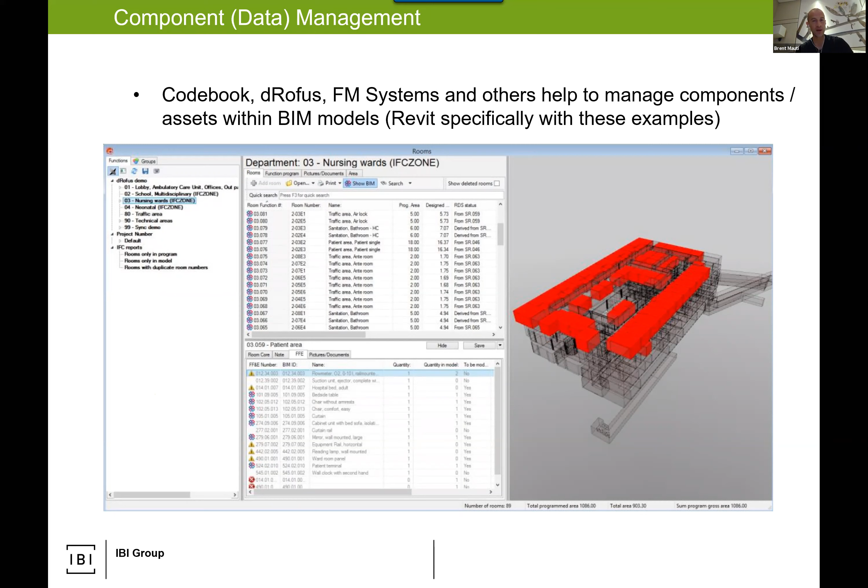Then Viz - I can talk about Viz forever. 3ds Max is our most common tool, and we usually use that to bring in models from anywhere - SketchUp, Rhino, Revit, OpenRoads, Civil 3D, doesn't matter. We use V-Ray as a rendering engine, but you could use Mental Ray or whatever. My team is convinced V-Ray is the way to go, and I say whatever, as long as you're all consistent, it's good.

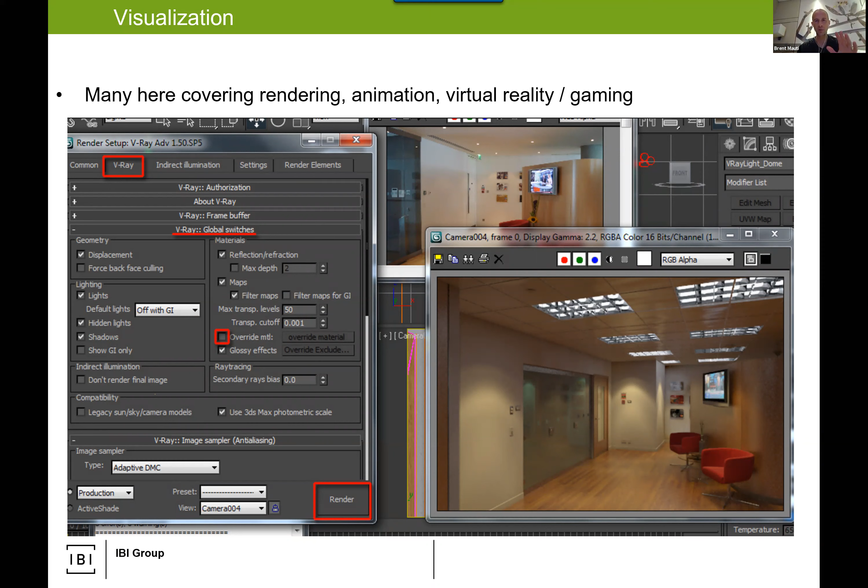And then we often feed from here into Unity or Unreal to do VR or AR. It's usually both - there are pluses and minuses to each, so we're actually exploring both. Unreal is a little more common, and Unity is used for some more advanced specific cases.

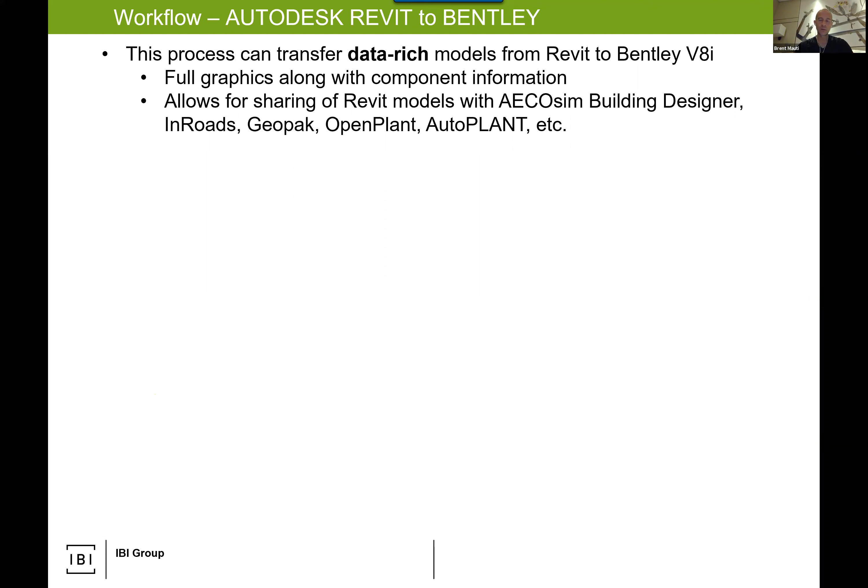So you have all this software, and you're going to have to share it. We'll talk about collaboration next week, but there's some fundamental things. You'll say, well great, Brent, Autodesk and Bentley don't talk - well, they could. So a couple things in the Revit world.

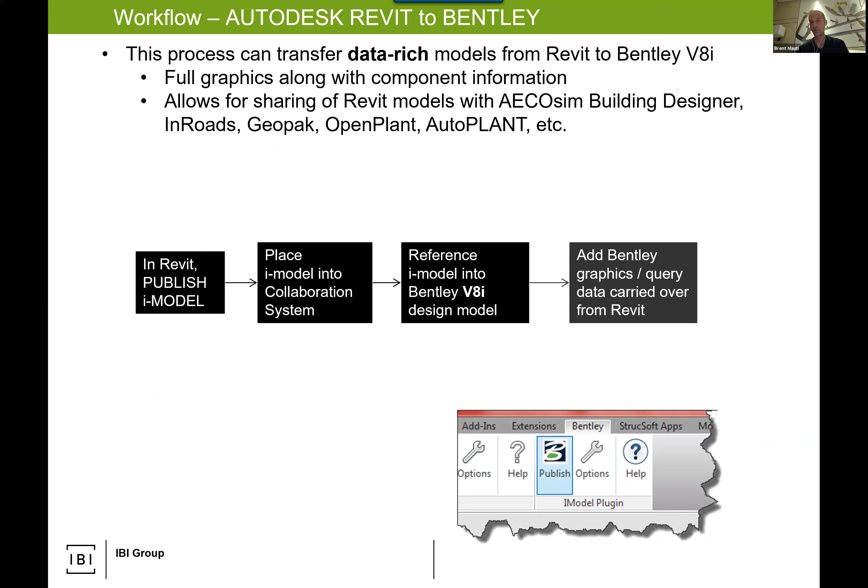I mentioned Bentley has introduced this iModel plugin. Essentially, make an iModel, put it into your collaboration system, reference it into your Bentley software, and it appears - as simple as that. This is Bentley's MicroStation, and that's a Revit model dropped in.

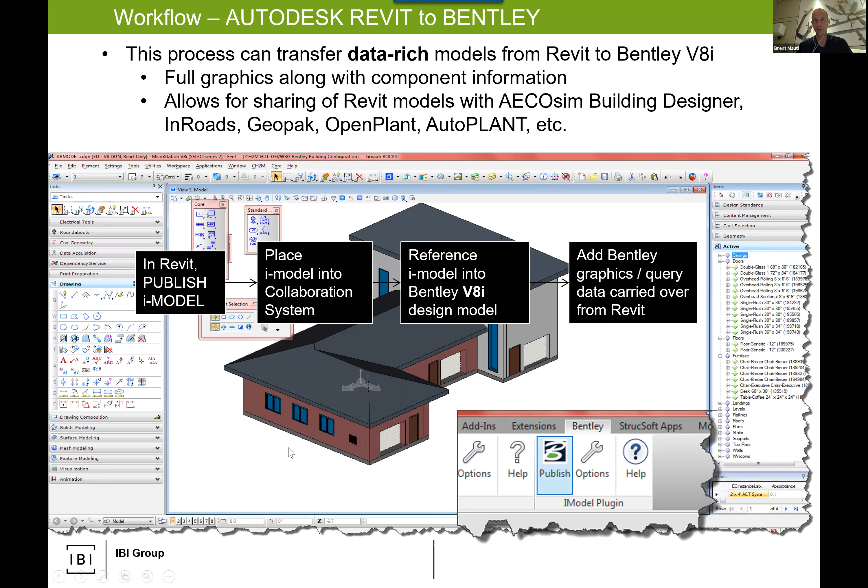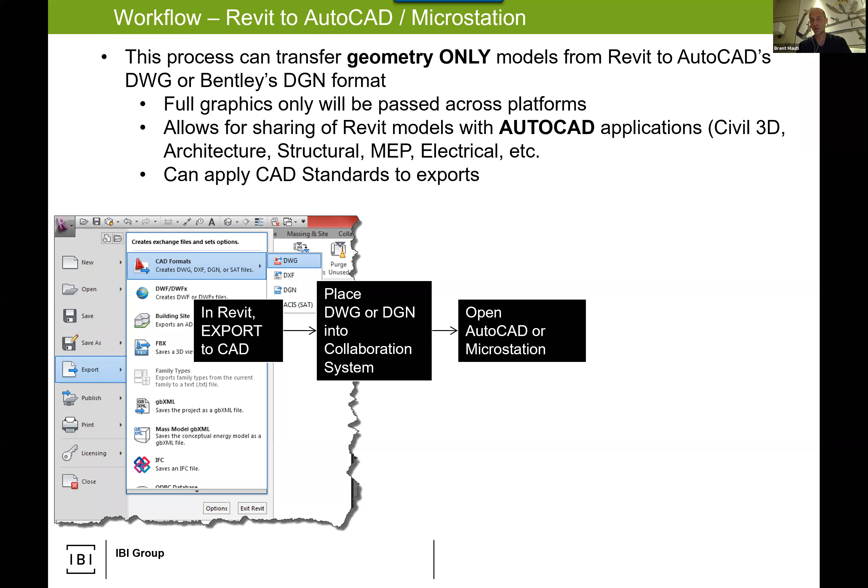What about going the other direction - going to CAD, I mean. You have your CAD exports - you can do DGN or DWG, open it up in AutoCAD or MicroStation, and model as needed. I hate modeling in CAD, but it could be done.

Going into Revit, Revit is funky, so I can simply link. And you're linking in - I hate how they do this, so it's one of those Revit-please-make-it-better things. I'm linking in a CAD format, and I could link in DWG models or DGNs. So you can link in your Civil 3D - here I'm linking in a piping model.

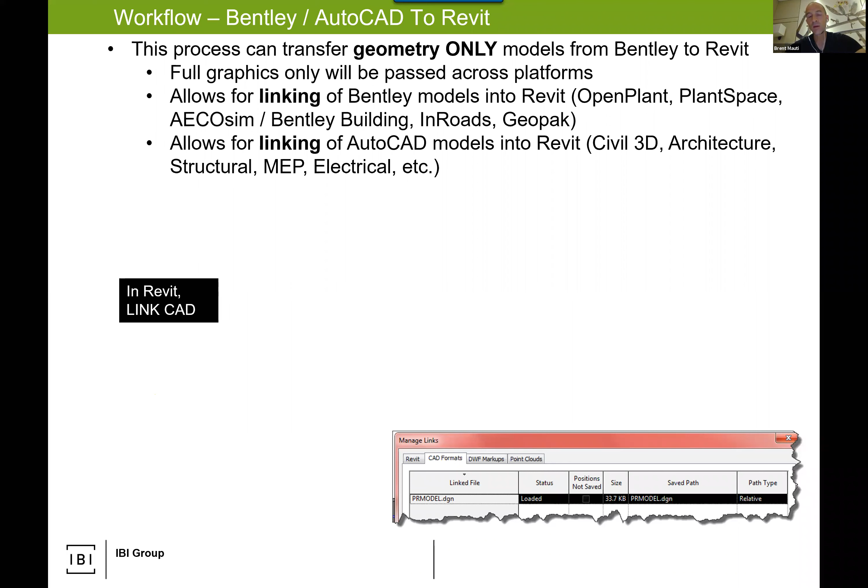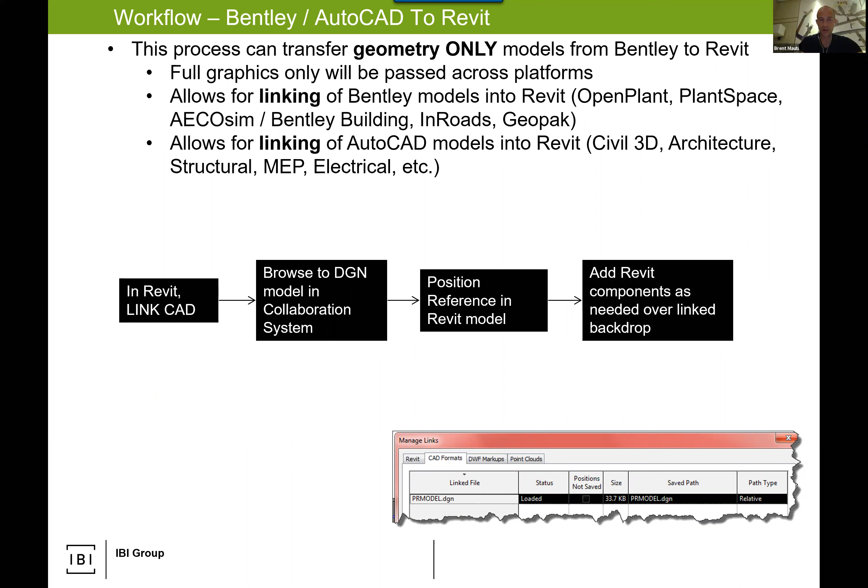But you know how Revit is with linkages, right? Browse to my system - I'll talk about collaboration systems next week, but I notice I keep saying that. Position my reference in the Revit model, and there it is - so here's my reference blob.

This was actually a project we were working on. The model was in Revit, and this piping was done in one of the DGN applications. You place it in and it's a blob and it's nowhere, so we usually put a marker - here's where the intersection of the floor is - place the piping in, and locate it right.

Now, at least in the world of Revit, we can very quickly see in a live modeling environment whether we're okay, and not wait until we get to Navisworks to process clashes, etc. Very quickly I can look and see - I've got a clash right there, this box is hitting that pipe. Let's just fix it, let's make it right.

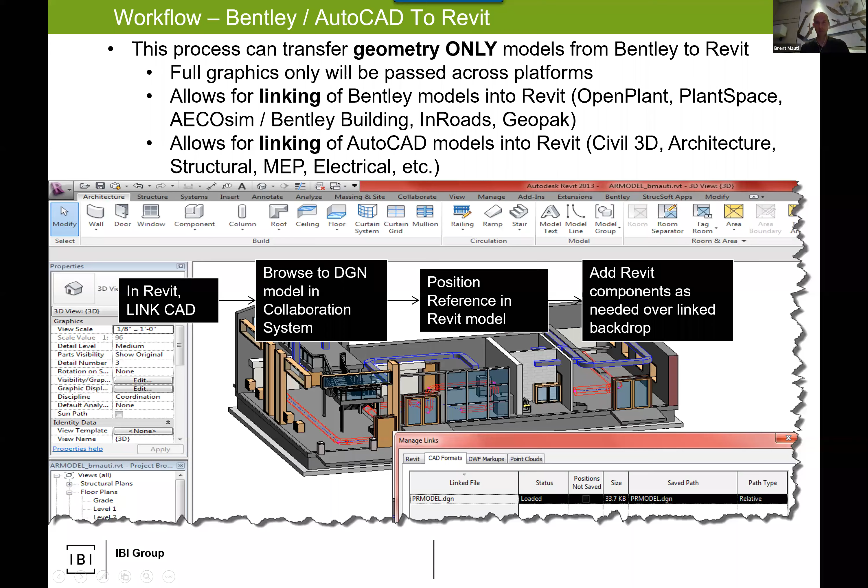So closing this, we're going to get requirements from clients. Remember, you don't want to go to a client and say, are you crazy? Remember when I talked about BIM recipes for success? You can have a good recipe and you can have really bad recipes, and that's all fine.

So when a client says, deliver my civil files in OpenRoads, but I want my building in Revit, right away you want to go to them and say, are you crazy? And then they'll say, oh, by the way, you have to use this building mechanical subconsultant. They're a tiny, small 3-person firm, but whatever the reason, you have to use them. But they only use ArchiCAD. You say, really? So you walk away saying, my building is going to be all Revit, except for building mechanical, that's going to be ArchiCAD, and my linear civil is going to be all OpenRoads DGN. What a crappy recipe, but away you go.

So imagine why I'm saying this right now. What do you think is going to be in those assignments next week? It's not going to be, here's a building that's 100% Revit. How would you share? That's too easy, right? You're going to have things like this because that's what happens. And you can't go to the client and say, you're nuts, we're not doing it, because the client will say, okay, I'm going to go to the next bidder and they'll do it. And suddenly I lost a $3 million commission because I don't want to go to my BIM coordinator and upset their morning, and let's figure out an answer.

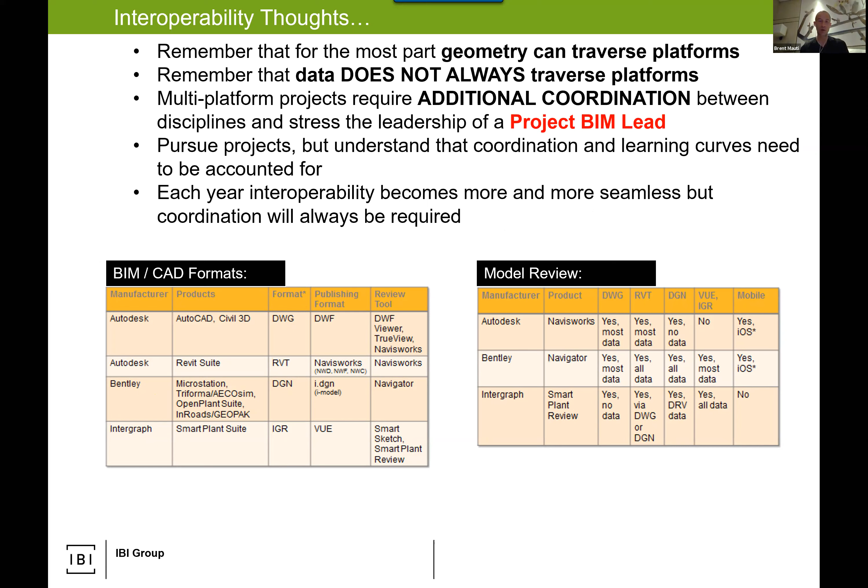So maybe that's the answer. But if we do this all up front, maybe as a small entity, I realize, oh, you know what, file export IFC, and then throw it into a collaboration system, a cloud hosted something. Maybe that's not too bad at all. Maybe I'll do it. So keep that in mind. Each year, interoperability becomes more and more seamless. Revit, link in ArchiCAD, well, I don't see that there yet. One day, and when they do that, I got to make the assignments a little more hard, I guess. But one day, interoperability, right?

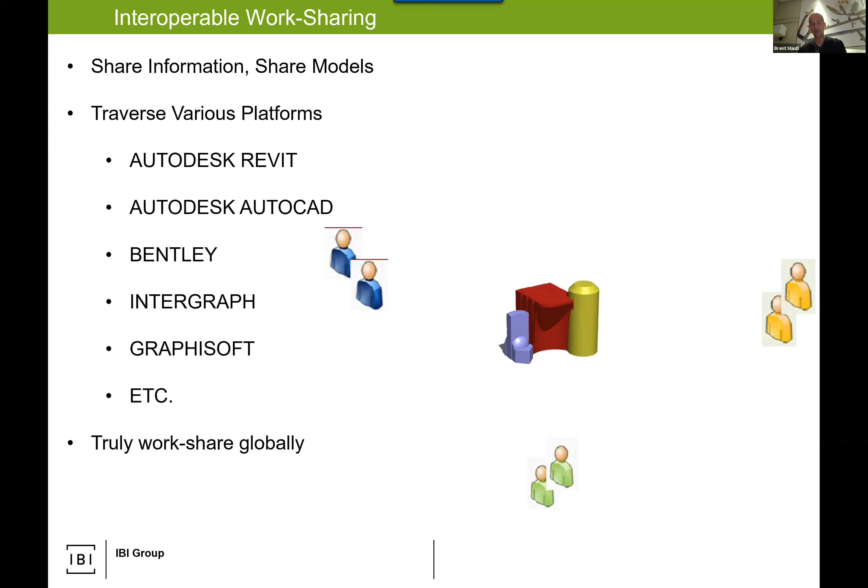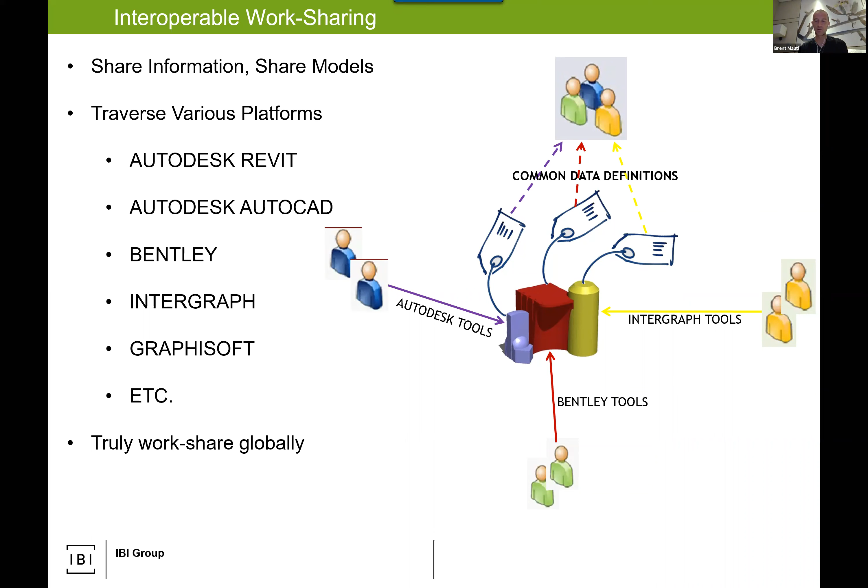I made this slide and showed it in week one more than 10 years ago. I could have these blobs of things, people all over the globe, multiple authoring tools, everything could come together. And in theory, that could happen. So imagine that's your building. Imagine I have Revit, I have AECOsim, and Smart Plant for the plumbing, which is overkill, but whatever. Architectural and structural are here, mechanical and electrical here, plumbing is here. It can all come together, feed and deliver. If you're interoperable, work sharing, common standards, common procedures, and an awesome BIM lead, results in this, and we could work. We can make things happen.

Always back to, what are you BIMing? Why are you BIMing it? Make sure scope, schedule, budget is there. Don't do more things than you have to do. Are there any client requirements? How do we all share to make things work? That's the picture coming together. And that's why I spend, my goodness, a lot of time talking about software.